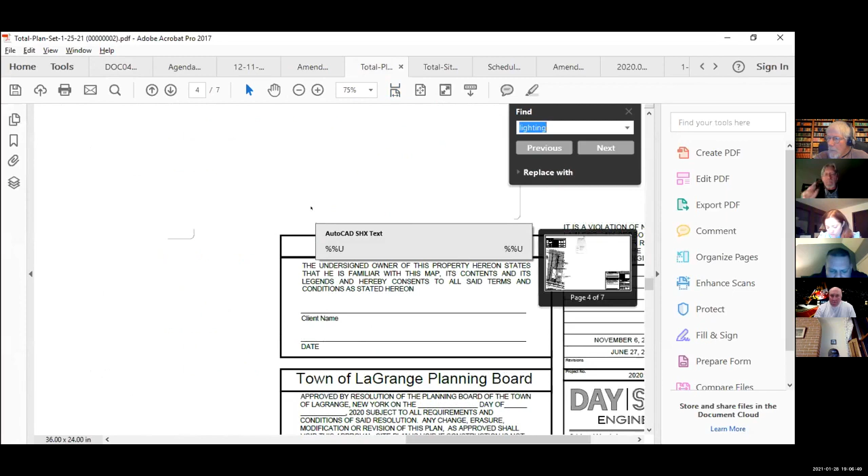We have a couple of infiltrators in the front of the property to handle roof runoff from the roof leaders. I show 2 rows of 3. We provided some calculations to support that design. And I think 1 row of infiltrators will work to contain a 100-year storm without overtopping, so we're just going to go with 1 row. That way the street trees that are within the parcel boundary can have adequate root space to grow in front of the property, so they're not inching toward the second row of infiltrators. So we'll go ahead and make that change.

Other than that, that's basically it. Just working through our final approvals. Like I said, this project will be subject to a DOT permit. We're going to do a slight feathering of the existing asphalt that enters the site.

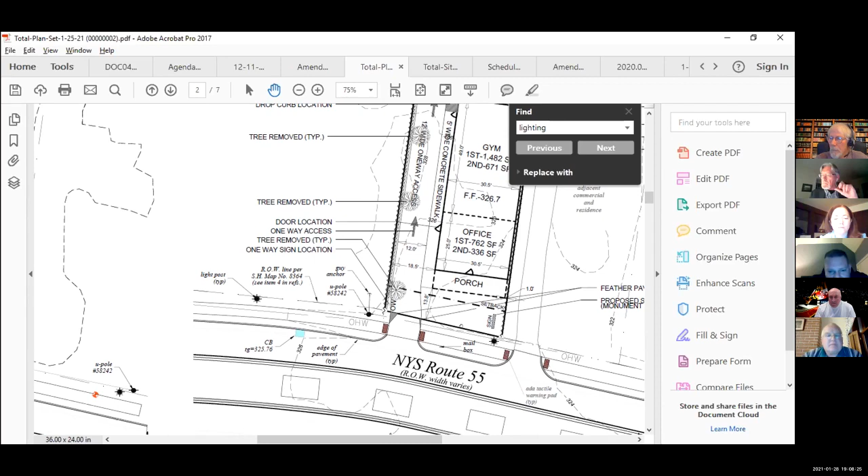There's like 8 square feet of pavement that we have to put in to establish the width coming into the site. Again, there's an existing entrance that will remain. We're just going to feather out the pavement. You can see it on the screen here with those 2 shaded areas.

And obviously we'll have a permit from Mike Kelly for Dr. Fink, and then we'll work with Wanda to secure the water supply modification. But again, all contingent items that we could kind of work through prior to chairman signing the plan. Other than that, that's it.

Chris, you're up. You're muted, Chris. Yeah. Yep, thank you. Nope, I had a frog in my throat and I forgot to turn it back off.

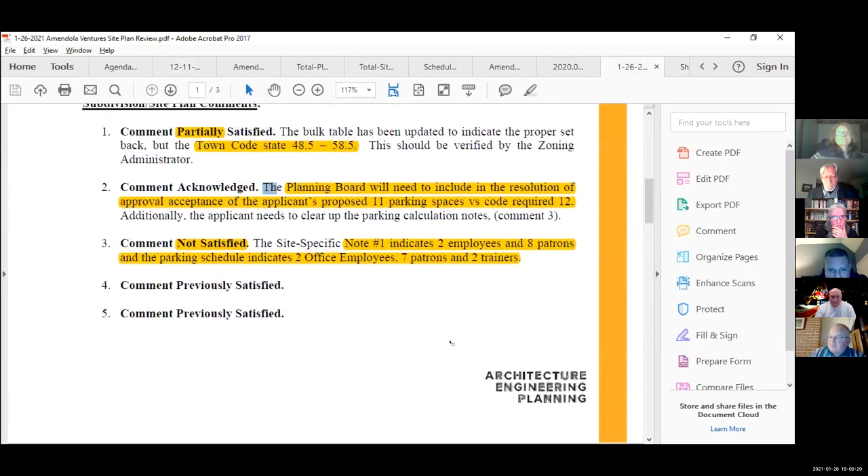All right. So I know that Greg Ballner from CPL had a number of comments in both his December 11th letter and his January 26th letter. Did you receive both of those, Brian? Yeah, I think we've worked through a couple of them. Again, I think these are like dot the I's, cross the T's kind of thing that we can work through after final. Yeah, there's a note on there to remove the chain link fence. We can do that. Working through the parking numbers in Board of Health.

I think there was a typo. It should be 7 gym clients instead of 8, I think, on the plan. So we'll make that notification, but the parking provided says 7 in one place and 8 in another, so it should be 7. Yeah, that was the Polish in me, dyslexic maybe. I don't know. So what did that leave us with? 11 total parking spaces or 10?

11, and the requirement under the code would be 12, so that's why they would be asking for a waiver of 1 less parking space based on the location of 7 patrons, 2 trainers, and 2 office staff. Okay, and that's based on the code, which says 1 parking space per 275 square feet gross area? Correct. I'm having a little difficulty hearing you, but it is the square footage requirement in the code, the number of parking spaces per 250 square feet, I believe it is. I'd have to look it back up, but it would be 12.

All right, good. And so there was also a question about the stormwater flow. Is that what you were talking about with the infiltrators, Brian? That's basically been addressed by the fact that he gave us the calculations on the infiltrators, and I had somebody in my office take a look at that, and the calculations were acceptable, and 1 row of infiltrators was satisfactory, so if they remove the 1 row of infiltrators, they have the 10-foot separation from the tree, so we don't have to worry about tree roots in the infiltrators.

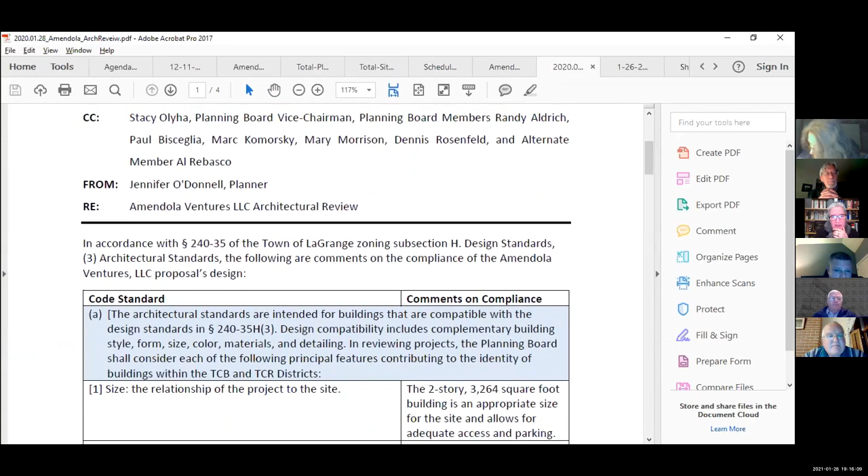All right, and then there was the question of the town center, which does require an architectural review, and there were some comments that we had about what was provided there. I don't know if it was Jennifer. Do you have the details on that? Yes, I went through the comments. I'm going to open that for you all. I went through section 240-35, subsection H, design standards, section 3, architectural standards, to see if the design complied. And actually a year ago when we met, most of these items were in place.

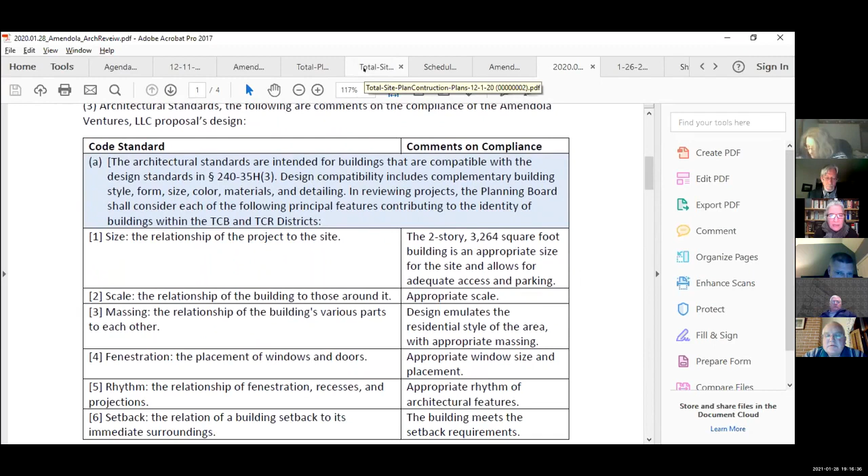So the building is a board and batten, 1.5 story, sort of 2-story. It looks like a residential structure. Let me see if I can, it's on the bigger plan. Hold on. And I only have a couple of questions for Brian. Brian, what page is that on? It's probably toward the end there. Yeah, so this is generally speaking

I can't talk right now. I'm in a meeting.

These are the elevations, and we had wanted to get them in color, Brian, but from what I remember, it is actually a monochromatic scheme, right? Yeah, white board and batten, black windows for the trim on the windows, and then standing seam black on the roof. Right. So the design from the beginning was very much in keeping with the architectural design standards. Here we go. There were just 3 points.

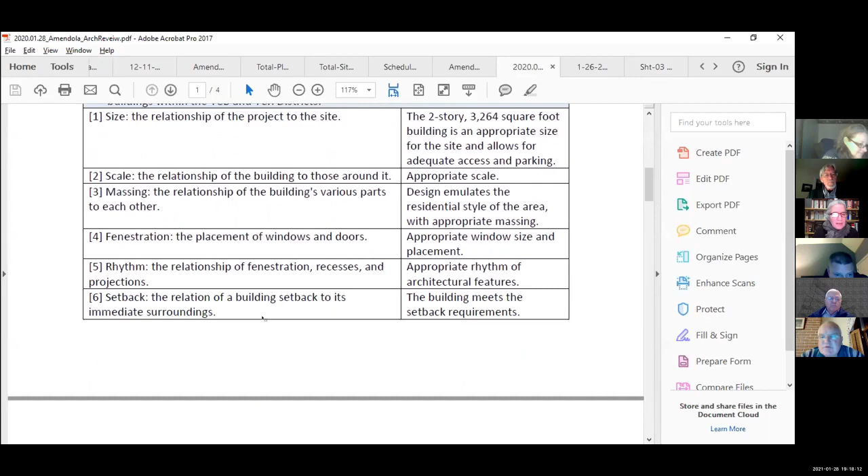Looking at this over, and this is of course only recommendations, the board can draw its own conclusions, but it seems to be appropriate in terms of its relationship to the site, the scale, the massing, the fenestration, the rhythm, the relation of setback to its surroundings, materials, except in one place where I found a contradiction. The typical wall section on sheet 104 shows asphalt shingle, so you need to revise that since I know you plan to do a metal roof. Yes, we'll coordinate details and notation. Okay, and chain link fence is discouraged also in town center, but I understand you're removing that.

And finally, the board and batten panels don't appear to extend all the way to the base of the foundation from what I can see on the elevations. The town center standards request that exposed or unfinished foundation walls not be present. So if there's a way to bring that board and batten further down, obviously it can't go all the way to the ground for moisture reasons, but if it can cover the seam between the foundation and the first level, that would be my recommendation.

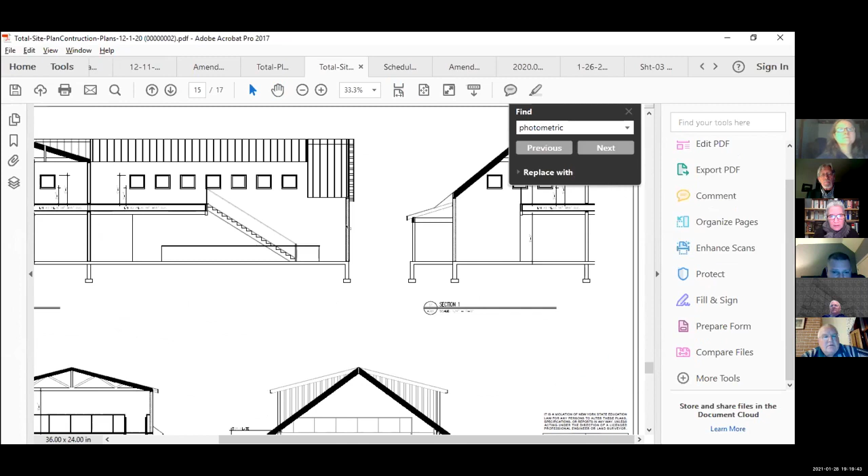Yep, we'll do that. The intention is, you can see here, that's the actual frost wall that goes down, so that's actually the footing of the foundation. If you look at the illustration above, that board and batten does go down. Okay. What you're seeing underneath is the footing or the frost wall. I just couldn't find a detail that demonstrated that. So Jennifer, go back up to the other one you were just on. The line sticking out by the door and by the porch, that's showing you what the elevation of the existing ground or the ground will be.

It was hard to tell. I could see that. Well, that's what I'm asking him. Yes. I'm asking Brian. Yes, ma'am. Okay. I just want Brian to confirm that. Mm-hmm. Yeah, I think what we're showing in this case right here is worst case.

The best case would be, this all works back to financials, as I know the applicant does some very nice stonework. So there may be the option down the road that he would maybe peel that back and do some nice stonework along the base. But as of right now, just to keep the budget, we're going to keep the board and batten going down to the grade.

Okay. So Brian, can we go ahead and make that a part of it, that if there are any exposed foundation walls they will be decorated in stone or covered in stone or something other than cement or cinder block? Yeah, most of this building is going to be at grade, so there shouldn't be exposed grade. This is more like from finished grade up to the window. Yep. To the bottom of the sill.

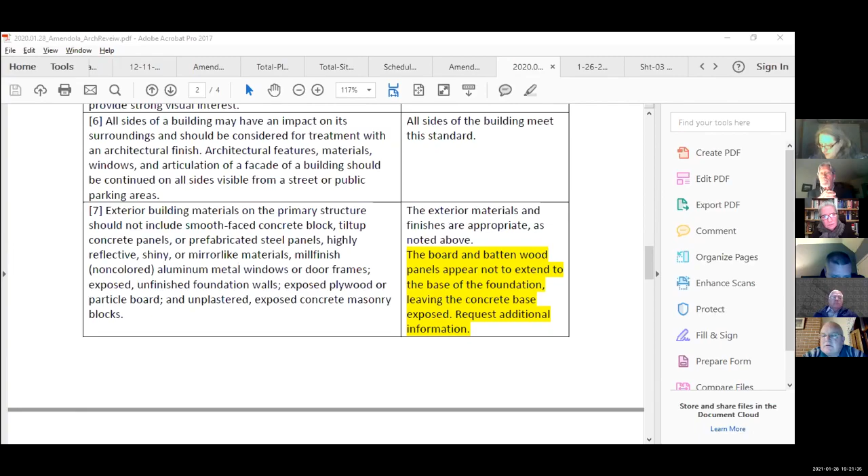Okay. Just like some nice stone detail, but as of right now, just from budget constraints, keeping the material going down. And just if there are changes, just check with the building inspector, okay? Yes, ma'am. Okay. All right. I have one more thing too, Chris. Go ahead.

In town center, what we've been doing is, because the high school had presented us with some good suggestions about our Blanding's turtles that are in that area, they suggested that we ask businesses to put up a sign in their parking lot that says, please check under your car for turtles or wildlife or something to that effect. I know that the bank has those signs. I don't know exactly how they're worded, so you might want to check that. Just one in there, just so that people know.

Sure, we'll handle that with a notation on the plan. Yep. Yeah, that's the Mid-Hudson Credit Union. Yes. Has the sign. Yeah, and the DEC liked that idea when we told them we've been starting to do that in town center. Good. All right, so are we satisfied with the details of that architectural review?

So let me just recap. He's going to fix the notations for the metal roof. So we're accepting a metal roof. Yep. He's removing the chain link fence. And the batten board is at grade, so there is no exposed foundation wall. Right. Okay, so we as a board, Chris, just have to accept the design architecturally, that an architectural review was done by the planning board and that we accept it. So it has to be before we do everything else.

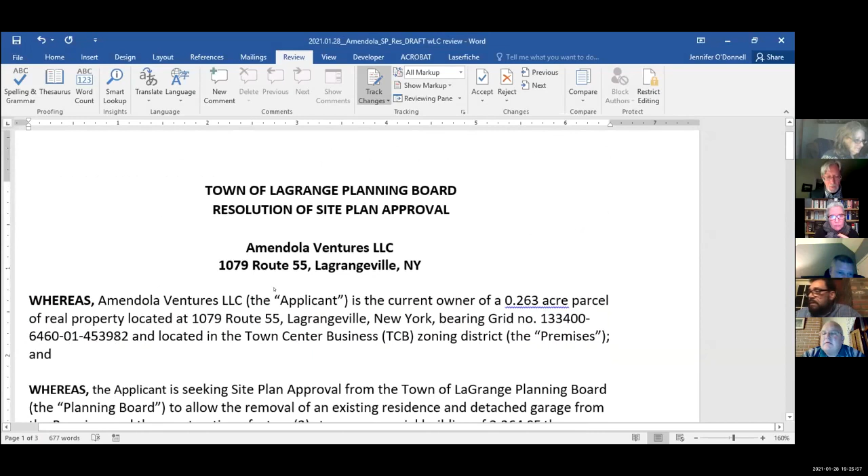All right, so I think the first thing we need to do is, and I'll need a motion to waive the parking to allow 11 parking spaces versus the code requirement of 12. So moved. Stacy seconds. All in favor? Aye. Aye. Is anyone opposed? All right, passed.

So we're also okay on the landscaping requirements, right? So now do we need to make that a resolution about the architectural review? As I believe, we vote on that, and we vote that the architectural meets town center zoning standards. We can do it. I thought we do that. Just put 240, I did. Yeah, 35. Yep. Okay, good.

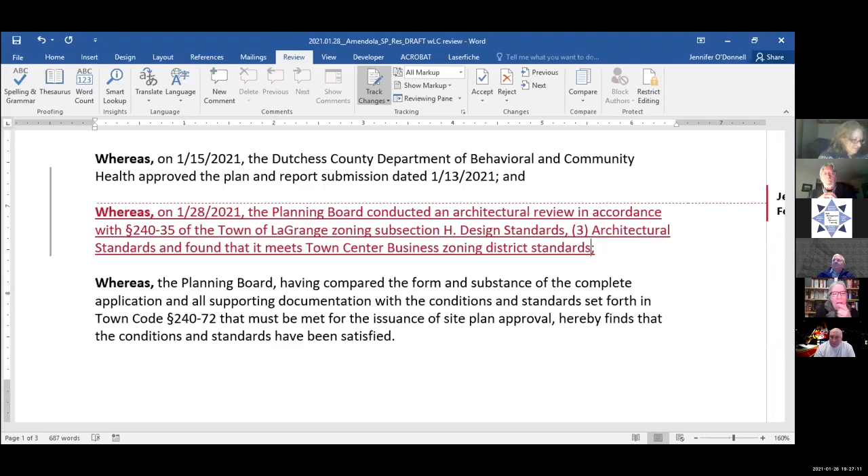So would you want to go through the resolution and the conditions now? Not quite yet. I do want to ask, so first up, we did go through some of the stuff, Greg, and I want to make sure that you're comfortable that the remaining things that need to be satisfied from your comment letter are sufficiently minor that you can review, that we could go ahead with a resolution and you'll monitor them and let me know, because I won't be signing the plan until you okay that they're all taken care of.

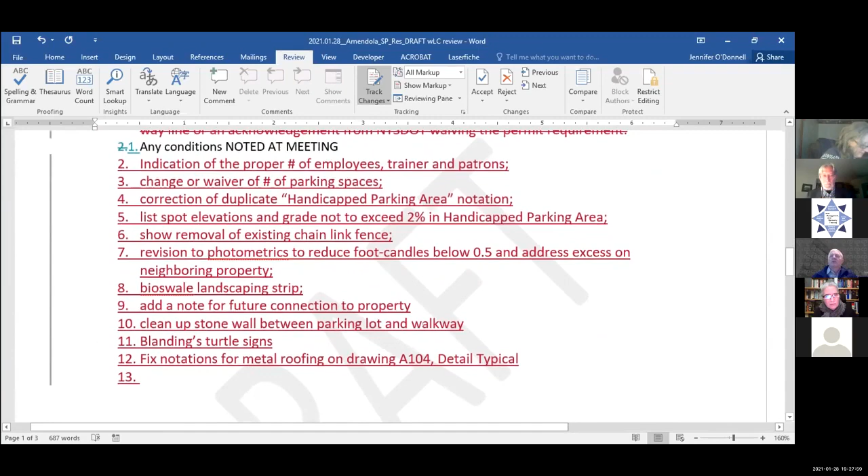Yes, I think the rest of them are minor. I will draw one more, and I think it may be in the resolution, but the foot candle lighting by the sign exceeds a little bit, but that's easy enough to address. It just needs to be addressed, and the photometric plan updated to address that. And the rest of them are just some note cleanup. Yep. Nothing of significance. All right.

Okay. Thank you. And then I would ask the town attorney if you're comfortable with where we are on this. If I can find my unmute button. Yes, I am. Okay, good. Thank you. All right. So if there's no other questions from the planning board, I'll ask Jennifer to go through the resolution. Okay.

So whereas Amendola Ventures, the applicant, is the current owner of the 0.263 acre parcel of real property located at 1079 Route 55 in LaGrangeville, New York, et cetera, in the town center business zoning district. I'm going to delete certain things that Lisa recommended if they're not, in fact, reused in the resolution. Okay. And whereas the applicant is seeking site plan approval from the town of LaGrange Planning Board to allow the removal of an existing residence, to construct a 2-story commercial building of 3,264 square feet.

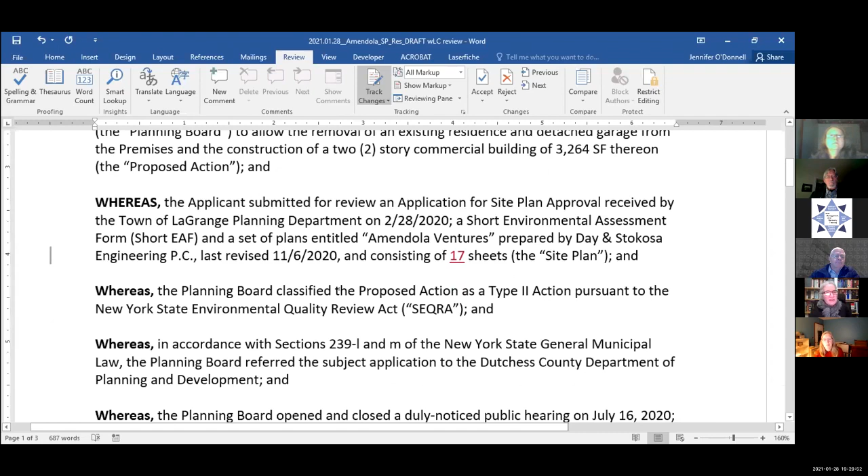And whereas the applicant submitted for review an application for site plan approval received by the town of LaGrange Planning Department on February 28th of 2020, including a short environmental assessment form, a set of plans. Does the last revision date of those plans need to change now? Yes, that's true. Last revised. Now it would be 1/24. Is that correct, Brian? 2021, yeah. Okay.

The one that you sent me consisted only of 7 sheets, but I think that might have been because you didn't include all the architecturals. Yeah, it was just a civil package. Right. But the whole set is going to have to consist of the 17 sheets, or at least I think it will, because of our architectural review.

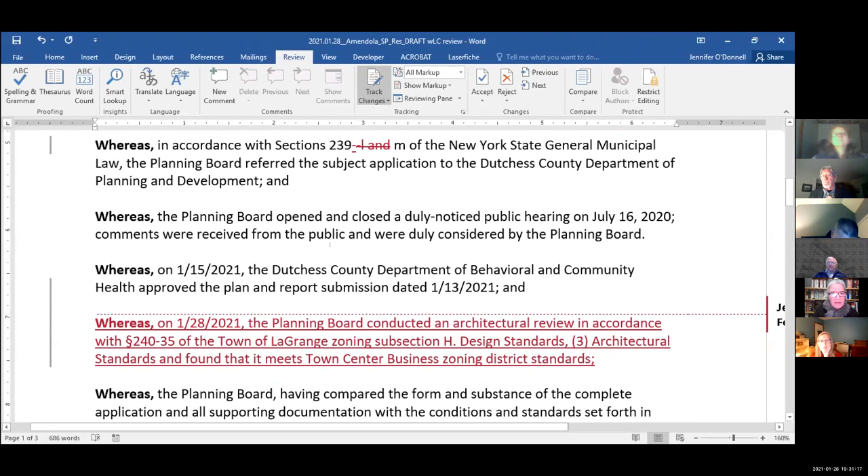Yeah, okay. Whereas the planning board classified the proposed action as a type 2 action pursuant to SEQR, and whereas in accordance with section 239-L and M of general municipal law, actually it was just M, it was referred to Dutchess County Planning. You should really reflect there what Dutchess County said, whether it was local concern or local concern with comments.

Well, in fact, they did not get back to us. The first time around, they asked for landscaping and photometrics, which Brian provided, but they didn't respond. The clock went over on their 30 days. Eileen checked with them. Isn't that right, Eileen? Eileen, you're probably muted. Yeah, I resent it to Brad Barkley on December 3rd electronically, and I even followed up with him in an email, and he never got back to me. So. Okay.

So that gives us a default matter of local concern, I imagine, right? Sure. Whereas the planning board opened and closed a duly-noticed public hearing on July 16th, 2020, and comments were received from the public and duly considered by the planning board.

And in fact, I'll just make a note here that the concerns that were raised by the neighbors regarding the speeding on Fink Road, we did a little analysis of that and what we could do, and ultimately an additional stop sign was placed there, and we hope that that's helping the circumstances. And whereas on January 15th, 2021, Dutchess County Department of Behavioral and Community Health approved the plan and report

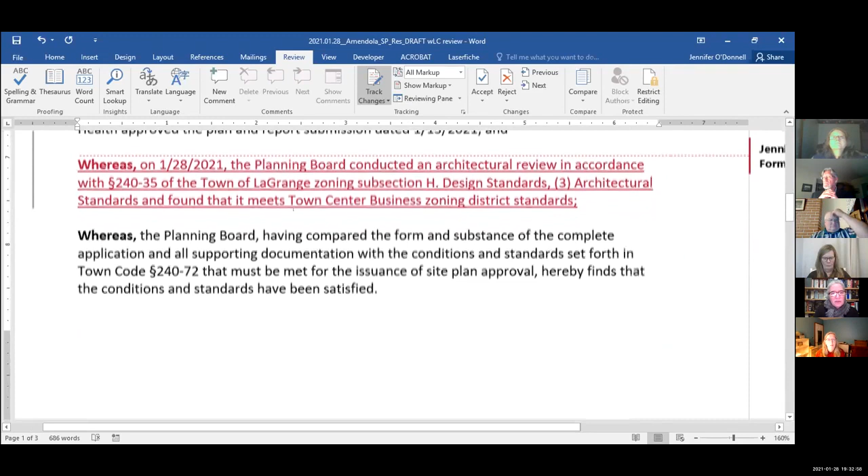submission dated 1/13/2021. And whereas on today, the planning board conducted an architectural review in accordance with section 240-35 of the zoning, and found that it meets town center business zoning district standards. And whereas, having compared the form and substance of the application, the board finds that it meets the conditions.

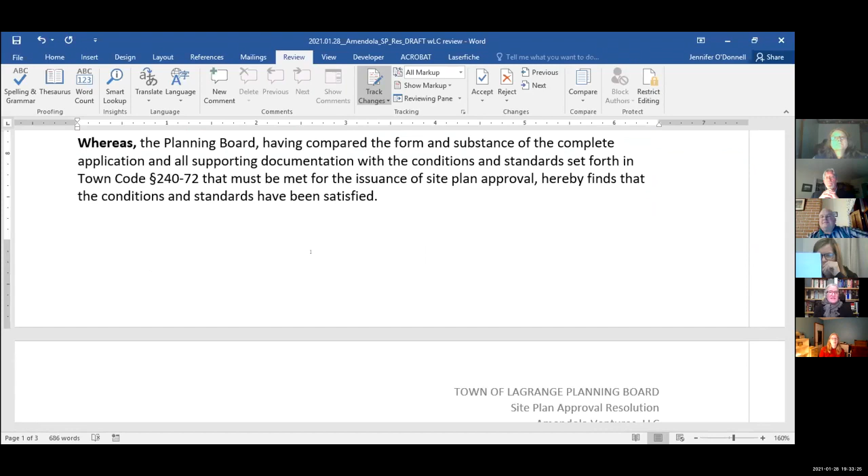Now, therefore, be it resolved that the planning board hereby grants site plan approval to the proposed action and adopts this resolution of site plan approval subject to the following conditions and modifications, which must be satisfied prior to the signing of the site plan by the chairman of the planning board. Now, there was a comment by Greg, and I just wanted him to mention why it's been removed since the last draft that you received. Brian, not Brian, Greg, would you mind?

The first comment, is that what you're referring to? Yeah, the DOT comment regarding the widening of the driveway. The DOT comment. Brian had spoken to the DOT. He identified that, and the DOT will not typically issue a permit. They'll simply issue an acknowledgement or a conceptual plan review, because the permit is issued to the contractor performing the work. Okay. Typical. So if you agree, that's not a condition of our

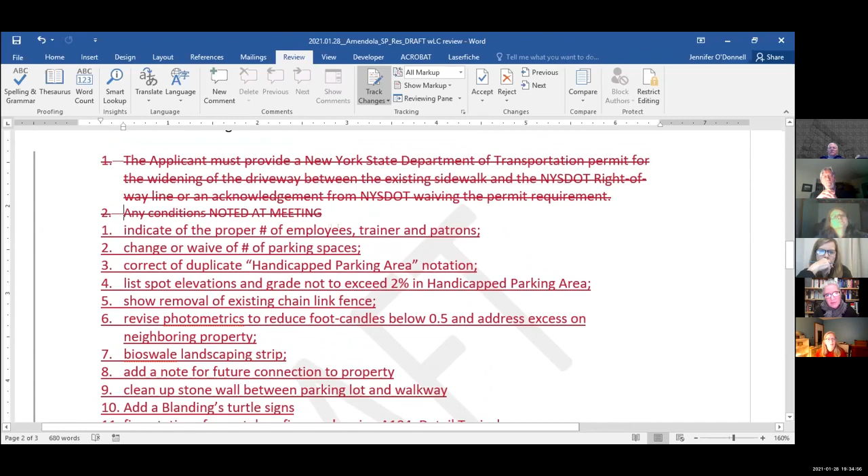approval. Number 2, do we have to do a whereas at the top that we waived 1 parking space to 11 instead of 12? Yeah, that's one of the questions I have. So Brian needs to change the notation of the proper number of employees, trainers and patrons. And does the board want to waive? We already did, didn't we? We just voted on that. Okay, so should I put that up above? Yes, that's supposed to be a whereas. Okay, I will put that in the whereas, that it's waived from 12 to 11, right? Yes, we waived 1 parking space.

Do you trust me to do it, or do I have to do it in front of you? You can do it tomorrow and you can send it to me and Eileen, and we'll approve it then. Okay. I mean, in general, you don't need to read anything that the board doesn't need to consider or vote on for these. So the beginning opening parts where you talk about what the project is, you don't have to read those at the meeting. You can simply jump to the conditions and make sure that the board agrees that there are no conditions that should be there that are not there presently. Happy to do that. Thank you.

So indicate the proper number of employees, trainers, and patrons, correct the duplicate handicap parking area notation, list spot elevations and grade, not to exceed 2% in the handicap parking area, show removal of existing chain link fence, revise photometrics to reduce foot candles below 0.5 and address excess on neighboring property. And I don't know what you said about the bioswale landscaping strip.

Did you have? My question about that landscape area was simply, is that a bioswale or is that simply a landscape area? And I'm not saying that it has to be one or the other. Brian, is that just a landscape area or is that a bioswale? Just a landscape area. We have our septic that's close to that area. Okay, that's understood. So it's fine that that's a landscape area. I just had the question. You don't need a clarification. No, they don't need to have that as a condition.

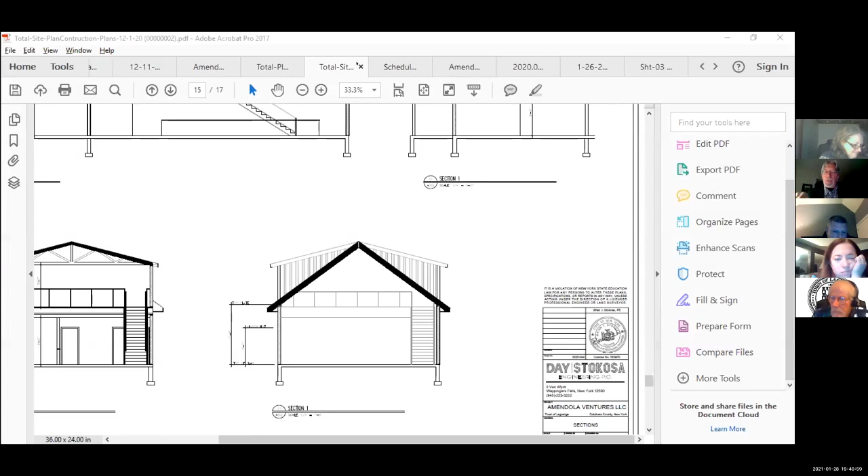And I would take a moment before we move on to the next item because I was remiss. I had not introduced our new planning board alternate to the rest of our planning board. Al Robasco is joining us. He was appointed recently by the town board, and I'd like us all to welcome Al and wish him many long nights spent with us. Welcome, Al. Thank you. Welcome, Al. Welcome. There you go, Al. Thank you.

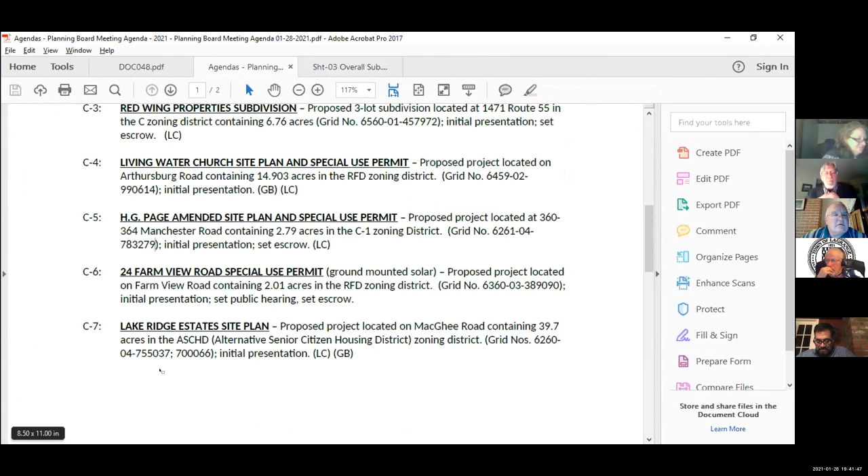Thank you. So the second point is, given the length of this particular agenda, I'm tentatively scheduling a short 5-minute break in between the Lake Ridge Estates and the Daily Farm item. If it turns out we don't need it, that's great, but I just want to put that on the table. I don't want people to have to be trying to attract my attention on the screen to say, let's get out of here for a minute.

All right, so the next item is Partner Rentals. This is an amended site plan and special use permit. Proposed project located at 84 Knoxon Road, containing 4.21 acres in the MGH district. That's the Manchester Gateway Hamlet district. Because of it being in that district, the special use permit is required for outdoor storage of rental equipment.

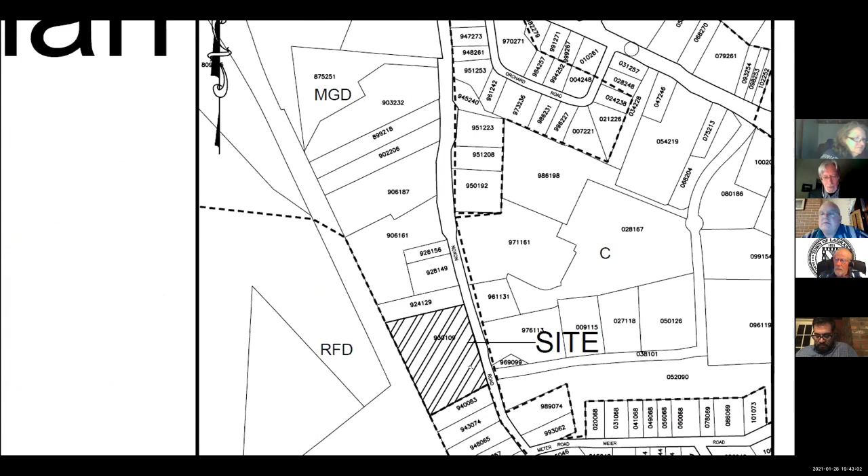And just to let people know, in case you haven't seen, this is almost directly opposite where Fireman's Way comes into Knoxon Road, where the old metal fabricating place used to be. It's since defunct. Our applicant is Fernando del Aguila, Partner Rentals, and Brian, I think you're up as their engineer as well. Yes, sir. I appreciate the good intro. If we could scroll to page 2, let's zoom in on the existing conditions and then we'll head on over to proposed.

This is the existing metal supply building that's located across from Fireman's Way. What's on site now is an existing slab where there used to be a building, where Jen's highlighting right now. Toward the rear of the building, there's an existing 50 by 60 portion of the building. Then behind that, there's a small shed area. There's an existing asphalt entrance into the site, and then it transitions into a hardened gravel surface. The site does have central utilities running past it along Knoxon Road, both sewer and water.

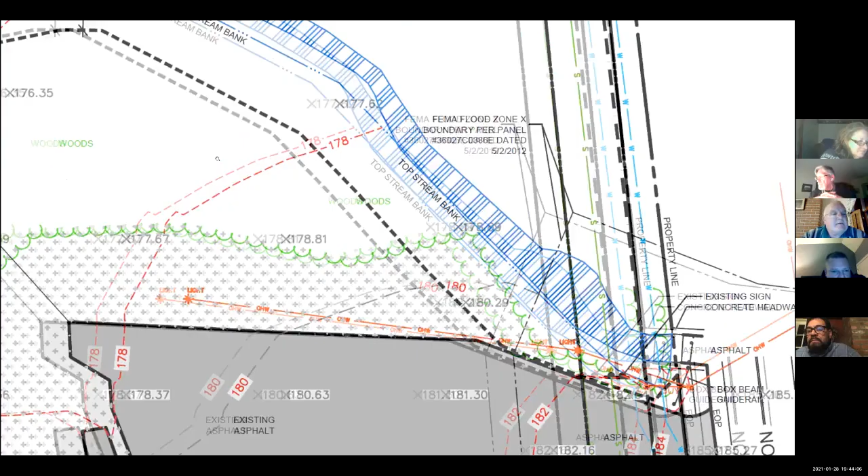And there is a stream located just north of the existing entrance in that highlighted blue section. It travels from Knoxon Road toward the rear of the property and then eventually goes under the rail trail. The big thing is the rail trail is right behind this building. So what the applicant is proposing to do is reestablish the building on the existing slab and repurpose the existing shed area and existing commercial portion that still remains and convert this into a commercial rental business. I want to say about 90% of their business is commercial accounts.

And with this action, they would be storing rental equipment on site toward the rear and toward the north in the slant hatch pattern that we're showing in the parking lot area. A majority of the site is already impervious. Where the commercial equipment is going to be going, we would transition the portions that are not hardened surface into hardened surface. There'll be a gate at the entrance for security purposes. 90% of their work is commercial based, so they actually take the equipment to the site and drop it off.

It's used, it's then picked up by their operators and brought back to the site. They have a retail component, but the bulk of their business is commercial rentals. They have an existing facility across the river in Kingston, New York. They'd like to come across to this side of the river and establish a location here to service the community.

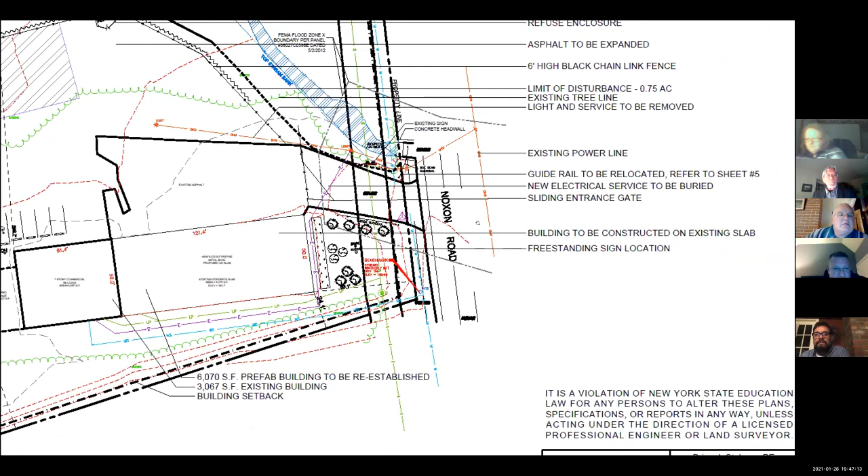May I ask a question, Mr. Chairman? Go right ahead. Brian, couple of questions. Will there be fuel oil tanks on this property? And if so, will they be stored indoors or outdoors? Being a rental business, there will probably be some commercial storage on site, probably outside within a containment unit. Okay, so with bollards around it and all the protective devices that are needed? Yes, sir. We will provide you additional detail on that and the locations of such. This was just to get the presentation in front of you. Okay, also on concrete pads, I'm sure?

Yes. Okay, and the other question is, how high will the chain link fences be around the property? I think right now I may be showing 6 feet for security purposes. That seems to ring a bell. That's what you're showing right here, Brian. There we go. Okay. Do you feel that's sufficient, or should it be a little higher? I could talk to the applicant about that. What's the board's feeling on a higher chain link fence?

Brian, you should check out HO Penn, because they're probably going to have some similar equipment to what these guys have, and kind of the same operation, only they work mainly with Caterpillars. I think theirs is taller, but this property is the first property in the Gateway Hamlet. So you have HO Penn, then the house and the apartment building, and then this. Those are all zoned something else. This is the first parcel of the Gateway Hamlet in this section of Knoxon Road. I just wanted to let the board know that.

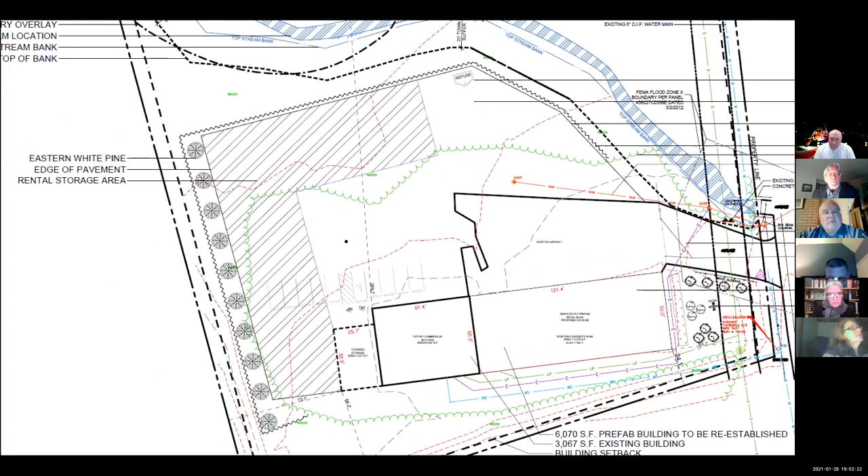And so no equipment whatsoever is going to go on a paved parking lot. Is that what you're saying? I can't read what that says. There's some tiny words right in the middle. I think it just says existing asphalt. Okay, yeah. So in the existing asphalt area, there you go. So that's not going to have any of your rental equipment on it.

That's the main access point coming in, and a lot of their deliveries are via tractor trailer. So if there is anything there, it'd probably be on a temporary basis for pickup or drop off, and then moved inside for servicing. Like a loading zone kind of thing. Yeah. Okay. We might want to delineate that as a loading zone area for delivery, so that we know that there might be something waiting there to go out. So if it's sitting there for a day, it's okay because it's in the loading zone waiting to go, if you understand what I'm trying to say.

Yep. And you're going to actually build another building on that pad in the front, right? The existing slab where the burned out building is, that's going to be a new building? Yes, ma'am. Reestablish the building. Same footprint. Based upon our input from tonight's meeting, we would go back, refine the layout based upon input from the board, with the next submission having full renderings to give the board an idea.

The applicant's colors are a whitish color and a red. That's their company logo. So there would be a theme of red and white on the building. They usually have a red stripe going through the building, but we'll show that in greater detail with color renderings in our next submission. And that's going to be for equipment, or for offices and other things like that? It's going to be a combination of both. Equipment, maintenance, repair, office, and that will be highlighted in our submittal package.

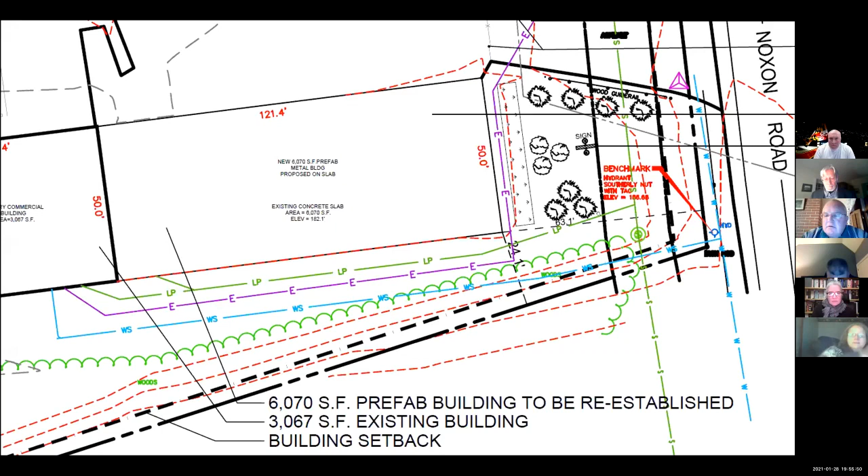And also think about the rail trail side, because I know you have your building in the front. That's a 1-story on the rail trail side. Is that going to remain, or are you tearing that one down, or reusing it? Well, the idea was to reuse, to keep budgets in line. Yeah, so it will give that illusion of the different heights. You know what I mean? So just make it blend in nice to the building that's coming into the front.

Will do. Brian, do you anticipate having in the interior any loft space, up some steps? There may be a mezzanine section in there. We'll talk it over with the applicant, and if we do, we'll provide you access points and square footage. Great, thank you. Right. Anybody else on the board like to request information to be included in future submissions that we haven't talked about already?

I'm wondering if you could come up with some idea of traffic flow into there, like how often the tractor trailer deliveries might be occurring. It would be helpful for us to understand that. Yep, we will quantify. Super. Anybody else want to bring anything up on that, planning board?

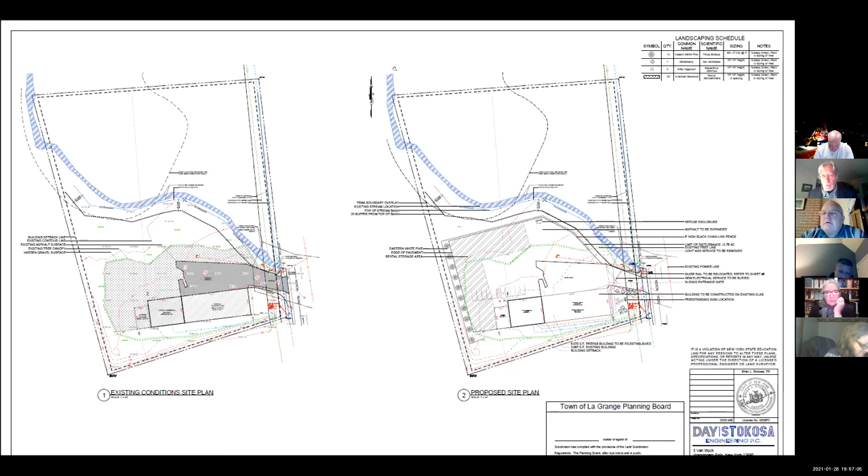So, hours of, oh, go ahead. Go ahead. Hours of operation? Okay. I think I have it on the cover sheet, Jen. I think it's 9. What are we, 9 to 5? I'm getting older. Monday through Friday from 7 to 5 and Saturday from 8 to noon. There we go. Okay.

So just another question. So your fence around your property is just in the areas where you're disturbing? You're not going to do the whole property, right? Just in the areas of disturbance where our rental will be, fencing will be inside of the tree planting, so the tree plantings will be on the outside. Okay.

And you've got some trees out in the front too, I think. Yeah, we provide some shrubs, some trees in the front. But we don't want to lose total visibility on the building, but some low growth. Right. Just look in the zoning, the hamlet zoning for that too, because that's specific. So just take a look at that too.

Yes, ma'am. All right, so before we move on, I think we're going to need to set an escrow on this. And I believe for this kind of thing, we normally do $2,000. It's an amended site plan and a special use permit. Do I need a motion for that, or do we just say? Well, we've been doing it, so we might as well be consistent until we change something. Okay, so let's do it.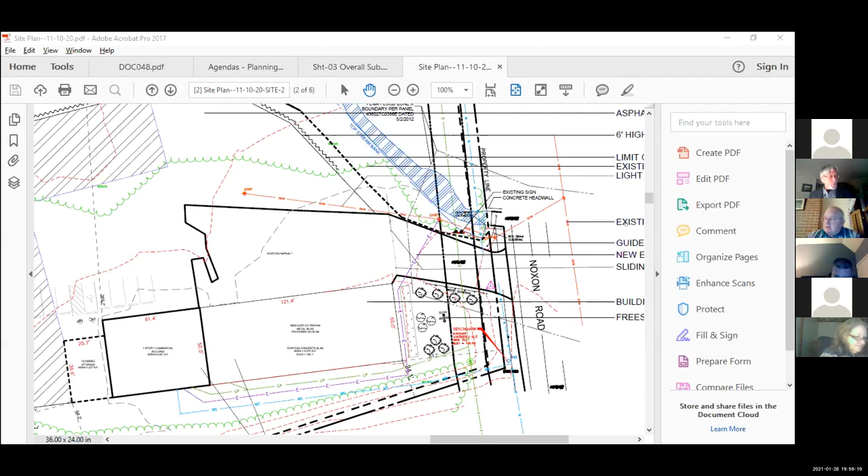Can I have a motion to set the escrow for $2,000? So move. Second? Second. Randy? Second. All in favor? Aye. Aye. Anyone opposed? All right, the escrow is set for $2,000, and we look forward to seeing you come back. Thank you, sir. Thank you, guys. Appreciate it. Thank you. Yep. Don't go too far, though.

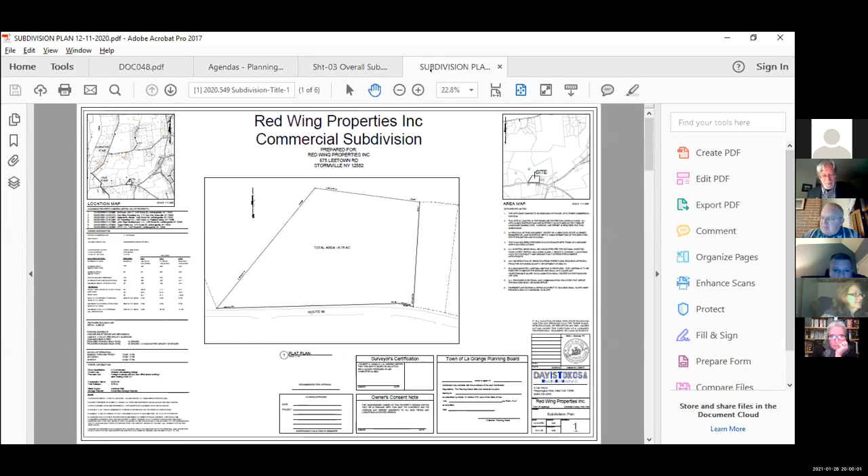The next project is Red Wing Properties. It's a 3-lot subdivision located at 1471 Route 55 in the C zoning district, containing 6.76 acres. The grid number is 457972, if anybody wanted to check that. The applicant is Paul Doherty, Red Wing Properties, and the engineer is Mr. Stokosa. We're back. Jen, if we could go to sheet 2.

So if we go to our upper right-hand corner here, this is our existing conditions plan. In this plan, I try to detail the site as it exists. Actually, we have 2 entrances off of Route 55 that go into the parcel. You can see one there. This is at the high point of Route 55, plus or minus. As you go toward Planet Fitness, in the westerly direction, there's another graveled entrance that leads to the back. There's an existing dwelling in the back right now that is occupied.

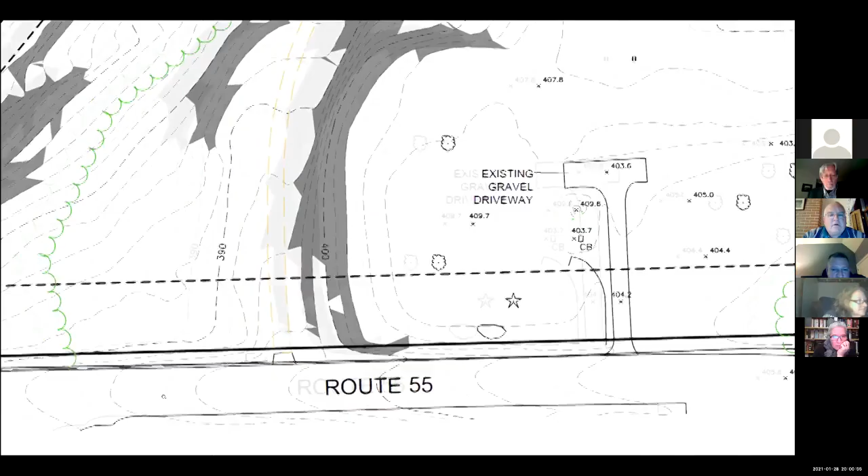What the applicant would like to do is a 3-lot subdivision. So there would be two pieces subdivided to create 2 small retail buildings in the front, and then the third piece would continue to support the existing dwelling and the existing access point. What Jen's pointing to is the same access point that exists today, and we'd just modify and widen that to have a commercial entrance to service the 2 parcels.

And then once you're into the site, there'd be a common drive, and we would venture over to the buildings left and right. Each have their own well, their own septic system and parking lot areas. In talking to the applicant, he was looking to do just a retail building, retail pad site. As of right now, no specific interests in the site, but just to start the process of trying to create these pad sites.

With the drawing that I'm showing here, with the hatched areas that are shaded, the dark gray hatch is your areas of steep slopes. With each of these commercial pieces, we show small bioretention areas in the back to mitigate any stormwater runoff.

Other than that, there's some preliminary landscaping shown. The goal for tonight was to introduce the project to the board, establish escrow, receive feedback from the board, and obviously take the application and start providing more detail with landscaping, lighting, moving toward renderings, but obviously just tonight to get a feel from the board.

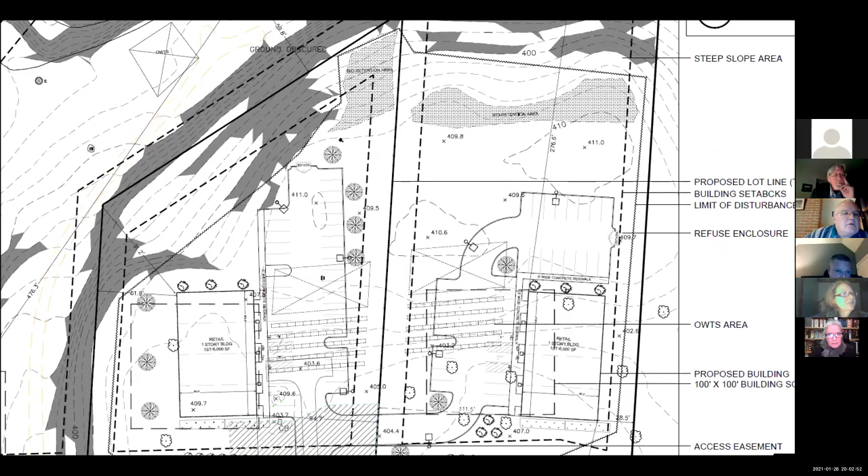On the parcel that has the little cottage on it, is the cottage the little square that's way in the back? Yes, ma'am. Okay, so can you just show the driveway to that, or are you going to share the driveway with something? The driveway is going to exist. It exists now, and we show it to remain. Okay, because oh, it's on that one. Okay, I don't see it.

Oh, it's very tiny. Very faint. Yeah, very faint red line. I've got a very old monitor, and I can't see it. So, okay. I'm testing everybody's eyesight tonight. It's on mine. It's yellow. Here, it's very faint. It starts here. It goes up this way. Yeah. And leads to the square. Okay, I see it now.

And you're going to have some screening there. So is that hill up, or let's see, which way are we going? I don't see the contour numbers, they're too small. Yeah, so the high point, we're going down. So wait, I don't see where we are. There we are. Okay, so we're going down. So the front property is higher than that little cottage? Yes, ma'am. Okay. And what's the elevation down there at that cottage? You're probably 15 to 20 feet lower. Okay.

And that's all wooded? Well, right now where the commercial aspect is proposed is all open meadow, grass area. Toward the back, as you work toward the back, around the cottage area, it is wooded. You can kind of faintly see the green tree line. Yeah, it's a little squiggle. Yep. Okay.

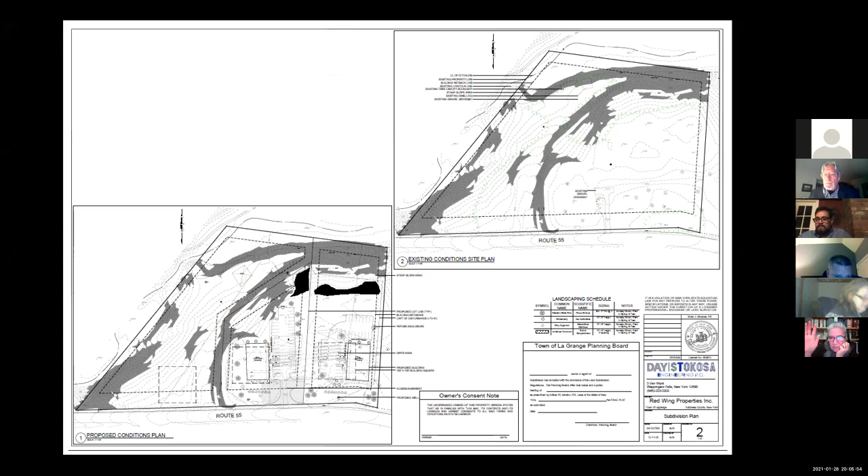Chairman? Yes. I just wanted to note that as of right now, the zoning is commercial. But Brian, take note of your bulk table, where's that? On the other side. Yep, right there. Zoning information. That'll change, although it suits both zoning districts, but it may change to general business if the FEIS is approved and accepted. Correct. So this wouldn't be grandfathered in to the old zoning for this particular project?

Sorry, the question? So the question is, since this is starting under the commercial zoning, would this particular project continue with commercial zoning for the reviews? Would it be grandfathered into that for this review? I think I asked that question to Lisa a few weeks ago. Lisa, do you want to add?

In general, the zoning that applies is the zoning that's in effect when you get your approval. It would really depend how the town board enacts their local law. They could make it only going forward or apply to things that are in the pipeline. But for this application, I don't think it's going to make much difference because the uses proposed are allowable under both. So unless it changes certain setbacks in a significant way, I don't think it's going to have much impact one way or the other. Yeah, it's not affecting this property. But the short answer is, typically, when you get your approval is when your zoning is locked.

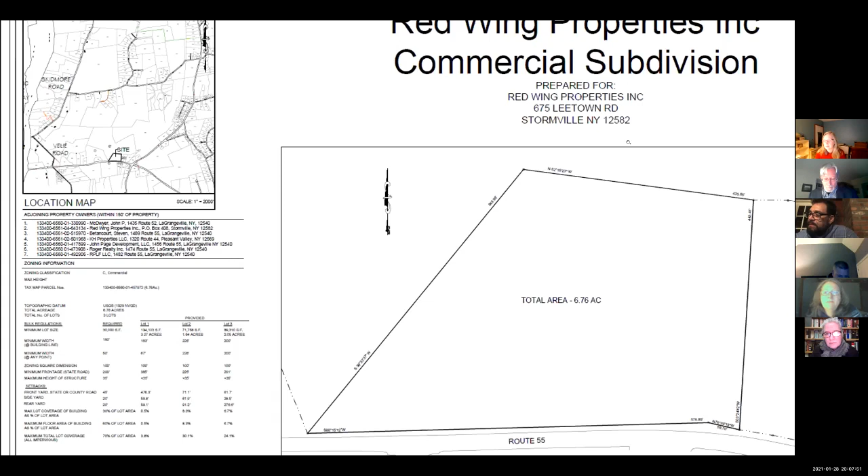Yeah, if you've had preliminary approval, but site plans don't get that, only subdivisions do. If you've had preliminary approval, then you're locked. If you don't have that in the subdivision, then you're not locked in. I think that's how our law is usually written. So it sounds like the zoning may change before we get the second submission from Brian, but we'll see.

I do want to point out that we had a letter from the LaGrange Public Works dated 1/17. Hopefully you've got that, Brian. It asks that you be directed to work with the Public Works Office to address MS4 compliance before the next submission, and then points out that it will require a review by DOT. They're also asking for floodplain, riverine wetlands, and wetland buffers to be added to the next submission.

Yep, understandable. Thank you. Any additional comments from the planning board? Anything you want to ask to be included in the next submission? What's it gonna look like when it's landscaped? To look like Disneyland. That's what we want to hear. Yeah, we'll get you some renderings. We'll get you a full landscaping plan, but obviously we'll do something that complements the site, complements the corridor, but also still maintains visibility to the site. Beautiful, beautiful.

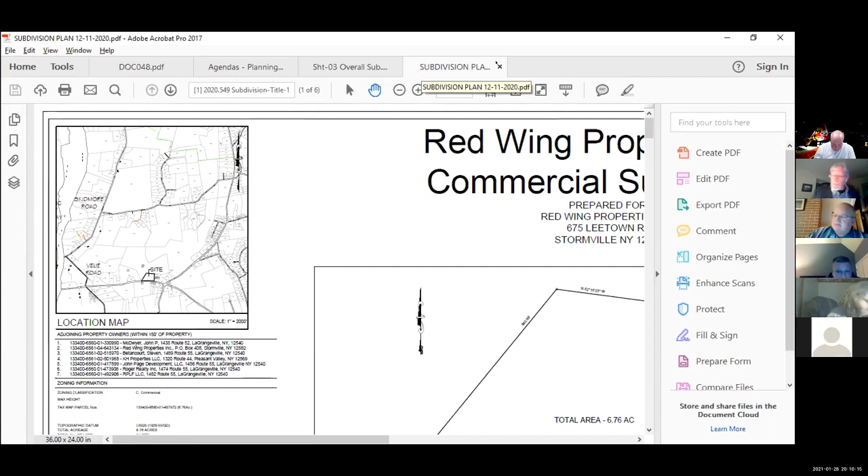So our next project. Wait, before Brian leaves, is Brian still here? Brian, you still here? Remember, we wanted to think about site visits for these. Oh, I'm not sure we want to do site visits for the initial. I think I'd like to see the next submission before we do that. Okay. Sometimes there's a very, very lengthy delay between the initial and an actual submission. There are two that I think we should consider site visits later on in the agenda. You okay with that? Yep, I'm good.

Okay. So we're now up to Living Water Church. This is a site plan and special use permit. This is a proposal to construct a 21,850 square foot church and worship center on Arthursburg Road on a parcel that's 14.9 acres. It's in the residential flexible district 80 zoning district. The reason why a special use permit is required is that in the RFD 80 zoning district, a special use permit is required for civic buildings and places of public assembly, such as churches. So our applicant is Kenneth Ewalt, Associate Pastor, and we have the engineering firm of Renier, represented by Peter Sander, that's handling this. Is there a representative of this project on hand?

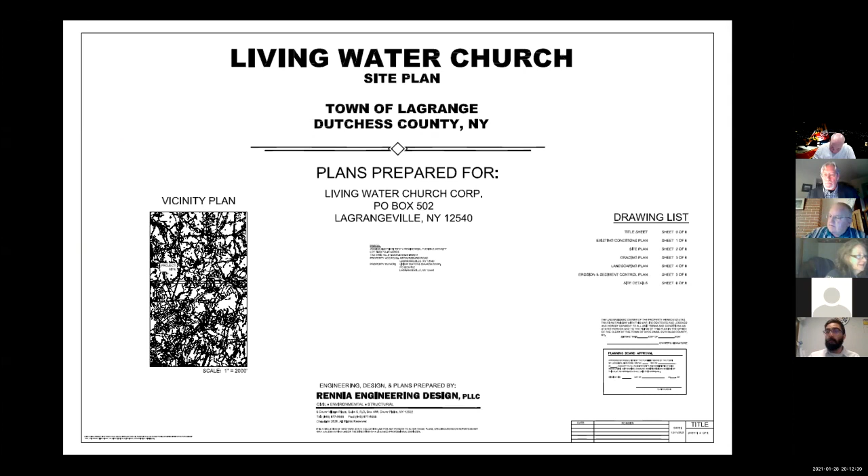So I'm just going to give you guys a little rundown of what we're proposing, and we'll open it and discuss it once I'm done. All right. So the applicant, Living Water Church, is proposing a 21,000 square foot plus or minus church/sanctuary building on Arthursburg Road. As you said, the parcel is located in the RFD district, requiring a special use permit. As you can see, the proposed structure is sitting on top of a hill, and you access it via this proposed boulevard entrance coming off Arthur'sburg. You'd come up the road and enter the parking lot area where you'll see the structure. The proposed structure is approximately going to have seating for 400 congregation goers.

Included preliminary plans show that we're going to have a mezzanine area with classroom space for toddler and pre-K religious education, and also office space for the church to conduct their administration work. There's also going to be a large foyer, which allows all the congregation goers to enter in this really aesthetic looking area overlooking the hillside. Also included will be a new deck area, which will allow people to congregate outside, as well as a tiered grass lawn, kind of similar to how you see it on college campuses, where you'll have grass and then a nice retaining wall that will allow people to sit and lounge out there.

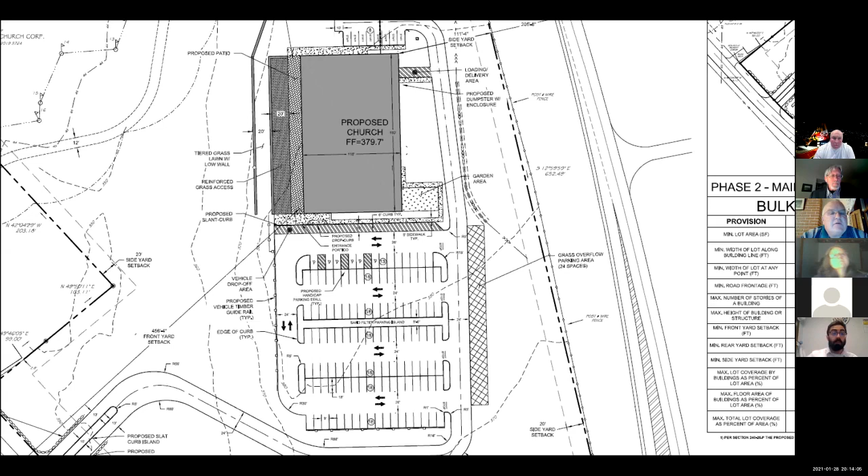Also shown on the site plan is a potential for phase 2. It's just very preliminary thoughts of possibly adding a pavilion area and then a maintenance garage for congregation goers to kind of repair their equipment and also store on-site equipment. Included as part of the development is the access drive off of Arthur'sburg, a new parking area, new septic, and stormwater features to accommodate all the proposed development.

Other than that, it's a fairly straightforward site plan. We wanted to just submit something preliminary and get some initial comments and feedback from the board, make sure we're on the right path, and be able to provide you more detailed plans in the future. Okay. I did notice that when you came to visit us in February of last year, pre-COVID, in fact, you had presented that preliminary idea of 16,675 square feet. So that was one of my questions, that you decided to upscale that. And it also was at that time to be located on 2 undeveloped parcels. So I'm assuming that you've combined the parcels and now it's a single parcel?

Correct. So both of the parcels have been combined, and the increase in footprint is after speaking with the architect and trying to work on the assembly space configuration. It turned out we didn't have enough space to accommodate the more modern designs with the angled seating arrangements towards the stage area. So we've had to expand it, and included with the expansion, we added some additional office space and classroom space. So that's for the expansion.

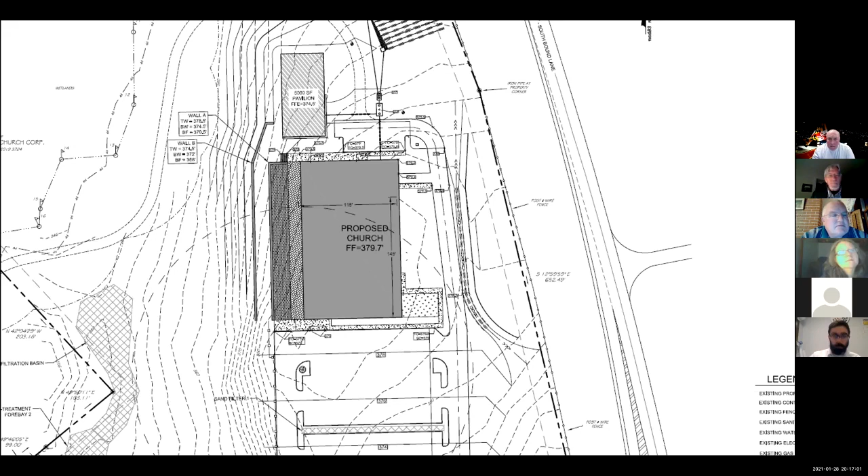Okay, I'm still confused. So lot number 1, LLC, do you own that? Lot number 1, that square parcel that's shown kind of in the middle, that is not owned by us. Okay. And you have an easement that goes across that? Is that what you're trying to say? Correct. Yes. You have an easement that goes across lot 1 that says you can use it as an access road. There might be a little more interpretation, but based off our previous review of the subdivision documents, it appears that the primary parcel does reserve an easement for that. Okay, so you should check into that easement because you'll probably need a new one.

Okay. Peter, on the secondary access road, what material will you be using for that? We were just thinking of a typical gravel access. Again, the primary entrance for the site would be the boulevard entrance off Arthur'sburg. We would not really want guests and churchgoers to go through that parcel on a regular basis. It's more to serve as emergency egress and then a possible walking path if people wanted to come down and check out the wetland areas. Okay, thank you.

I don't know how many of the planning board members know where this is or have seen it, but it's very beautiful. It's got some tall trees, very little underbrush, but a lot of rock and a lot of stone walls and what looks like what used to be driveways or some kind of paths cut into everything. I'd like to see some of that saved if we can, and incorporated into your drive to get into the site.

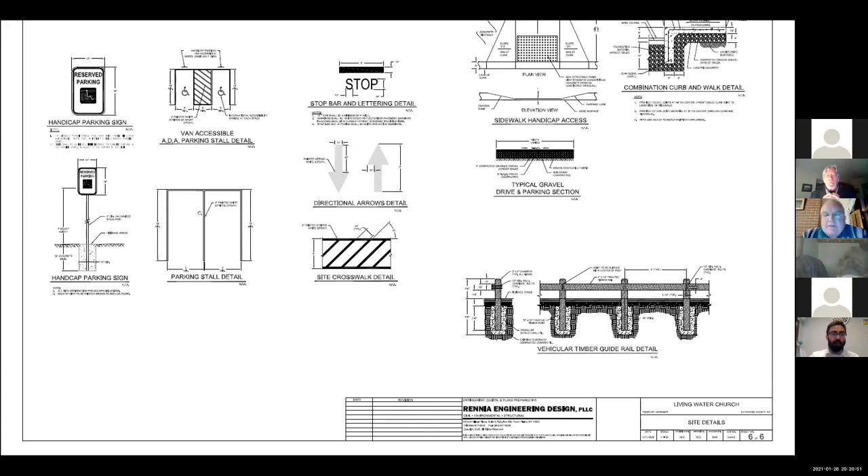And you did mention that the original intention was to do a steel frame building, but have more of an Adirondack Lodge style. Is that still your intent? Right. Yeah, that's absolutely still our intent. We kind of want to use some stone surfaces. It really gives it that rustic feel. We'll provide building elevations in future submissions as required, but I kind of wanted to run this idea and make sure that we were going in the right direction.

I do want to touch base again on what you mentioned about the potential future use in that upper area, there's a structure, possible proposed structure that's got the X on it. Sorry, that is actually not a structure. That's the location of our proposed septic system. It's that little tiny one right there. Yeah. It's right here, 5,000 square feet. Okay. And what would that be?

Just a pavilion? Yeah, again, this is a very preliminary thought based off of conversations with the applicant. They wanted more of an open space in the future, so it would be an open air pavilion currently. There may be some sort of enclosure to provide some bathroom facilities, which shows our connection to the existing septic tank. But again, this is a very future phase, where our primary objective is to get the proposed church structure in there first.

Well, you might have to build that one first so you can have everything outside and a social distance, you know? You might need to just open up the whole building.

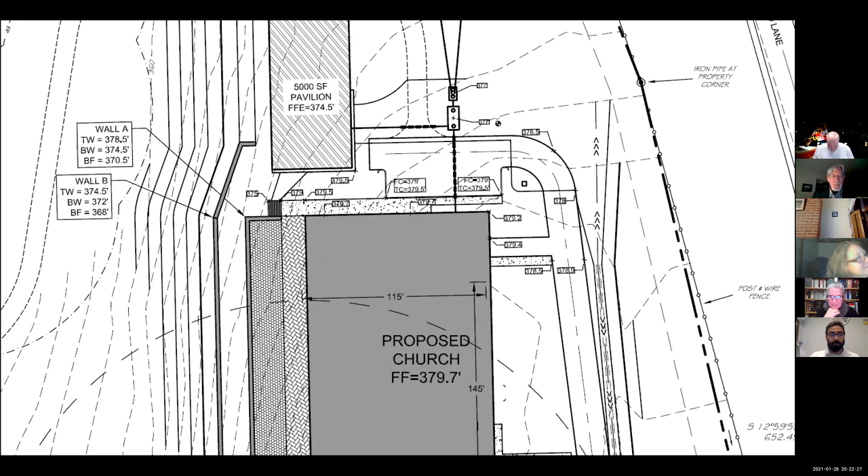That's right. But you mentioned something, maybe you misspoke, about a structure or a space where the congregation might be able to do their own equipment repairs. Oh, so if you go to the bottom right-hand corner of the phase 2 site plan on the site plan portion of our drawings, we show a small 900 plus or minus square foot maintenance garage.

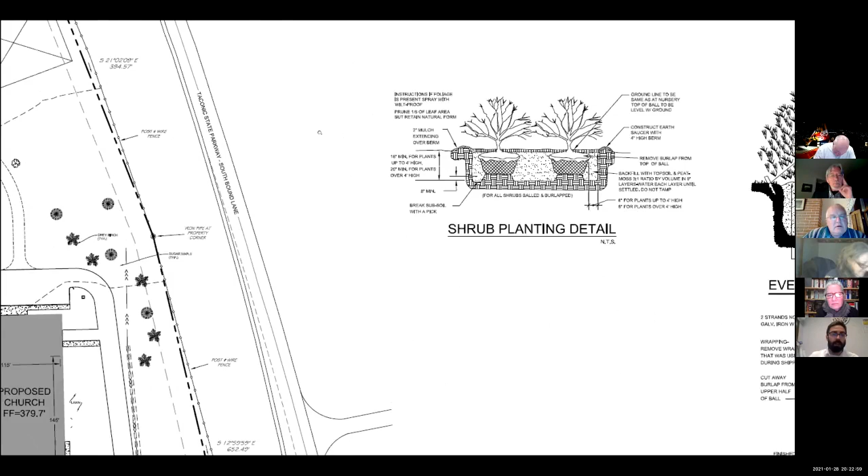The intent of that was more for equipment storage, but the applicants also were thinking about having congregation members bring some more community church services and organization, just to be able to help some of the older members out without having to send them to an auto body shop or something, but primarily on-site equipment storage for mowers and all of that. All right, so we may want to explore that more as we move forward on this. All right, were there any other?

Go ahead, Stacey. Yeah, there's specific parking lot requirements. So you might want to look at those, the type of curbing, the type of landscaping that has to be within the parking lot. There's all kind of specific regulations for that. So you might want to look at that before you actually design the parking lot totally. Okay. Right now we're actually incorporating some of our stormwater aspects into that island. We have a sand filter in that main median to kind of catch sheet flow coming from the building.

And if you've ever been to Adams down in Wappingers, they have a nice bioretention rain garden type thing in the middle of their parking lot that's collecting a lot of their parking lot stuff. But I know this lot is like almost solid rock, so you have to work with that too. But some rain gardens inside your little landscaped areas in your parking lot might be nice little additions, to not give it so much of a feeling of a lot of blacktop, but also break it up a little bit and really get some green space in there. Get some serenity to it.

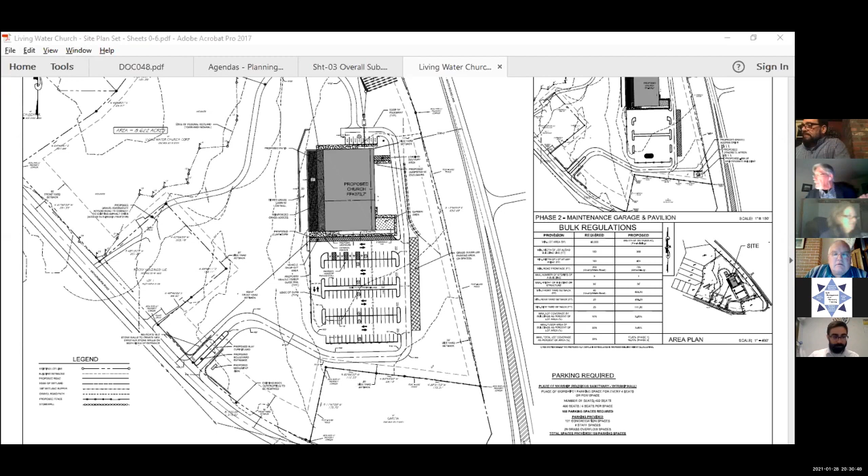Our next item on the agenda is H.G. Page Lumber. This is an amended site plan and special use permit.

This is a proposed amended site plan located on Route 55 at 360-364 Manchester Road, containing 2.79 acres in the Manchester Gateway Hamlet. And as with the previous application, because it's in an MGH zoning district, they require a special use permit because of proposed outdoor storage of landscaping materials.

So to position this, it is located in the area that used to have warehouses in between the Page Home Center and the corner where the light exits Old Manchester Road. Applicant's H.G. Page, and the engineering group is LRC Group, and I believe Kelly Leibold is representing them.

Are you here? Yes, Mr. Chairman, thank you. Okay, Kelly, thank you. Do you want to share your screen? Oh, yes, sure. It says host disabled participant screen. Okay, hold on. Sure. I'm giving it to you. There you go. You should have it now. All right. Okay.

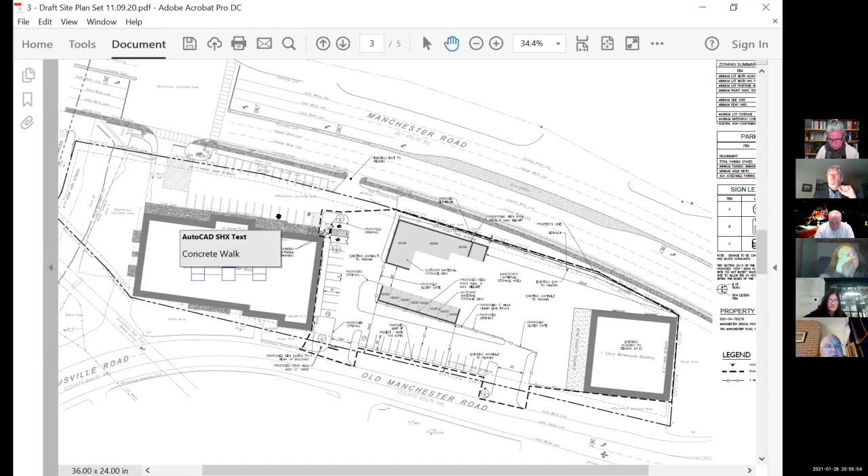And then check out the parking, because I think the reason why they're over there is there's planters in front of the building. Right here, yeah. And there's steps in front of the building. The only place that there's a nice gradual grade is along that wall, along that walk there. Yeah, I saw that Ken Casamento from LRC had created that little ramp area, and that's why I think they were placed there. Well, that's where they exist now. See the one in the front? That's where it is now because that's the most gradual grade to get up to the sidewalk there to get into the store.

Because the side over here next to your number 12, those are stairs. You have to go upstairs if you're using them down here in this corner where the building entrance is, that's where you go and buy the building materials. Yes. Down there by number 12. That's like 5 or 6 steps. Okay. Here you're saying, yeah, this is a big, steep site. Yes, correct. Thank you for that comment.

I was going to ask that too, where it says proposed new entry to rear of building. Are you keeping those steps or getting rid of them? They're staying. I don't know why that is there, but those steps are staying. Okay, is that going to be a ramp? I think what it is, there's a sidewalk here, which is a new entrance. These parking spaces here don't exist now. This is where everyone goes flying through at night to cut through. So what we're doing is creating these parking spaces, and then this sidewalk is being added. So I believe that's why that says proposed new entrance here to the sidewalk, and then you can get back into the front of the building. Okay, or is that going to be a ramp up to where that stairs is, you think?

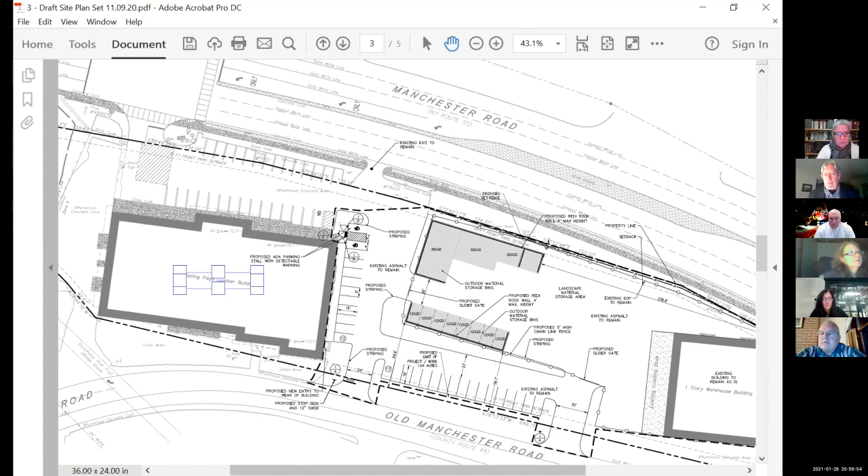Yeah, we want to see what you've come up with, because some of the stuff that we've asked you to do is to check into these things and give us some ideas, like the type of fencing, where the fencing is, the landscaping, that kind of stuff. So when we see that, we can get a better idea if it's more of what we have envisioned for the site. Okay, very well.

Mr. Chairman? Go right ahead. I just want to ask Kelly a question. Kelly, when you do make the resubmission, you can submit it to me digitally. Can you also supply 3 hard copies? Because now we have a board member who prefers paper maps rather than digital maps. Very well. We will do that. I appreciate it. Thank you so much. You're welcome. Thanks, Eileen.

Eileen, are you sure we don't need more paper copies than that? I thought we need 4. No, 3 is fine. Just for the resubmission. Once we do a referral and that's accepted, then Kelly will supply me with more. Most agencies now are doing it digitally, right, Jennifer? Yeah. New York State DOT, for example, takes it digitally now as well. And county planning.

But we need DPW, which is ours, Department of Public Works. We need zoning and one for our file. So that's three. It's too soon to ask for those yet, because once the amended site plan is reviewed by Greg and there are more changes to be made, I don't want to send it to county planning and get it booted back. No, I'm talking Department of Public Works, our internal. That includes Wanda. So it'd be Wanda, then Ken, and the file. Ken's already made a determination on this. Yeah, but as building and zoning, they review it also.

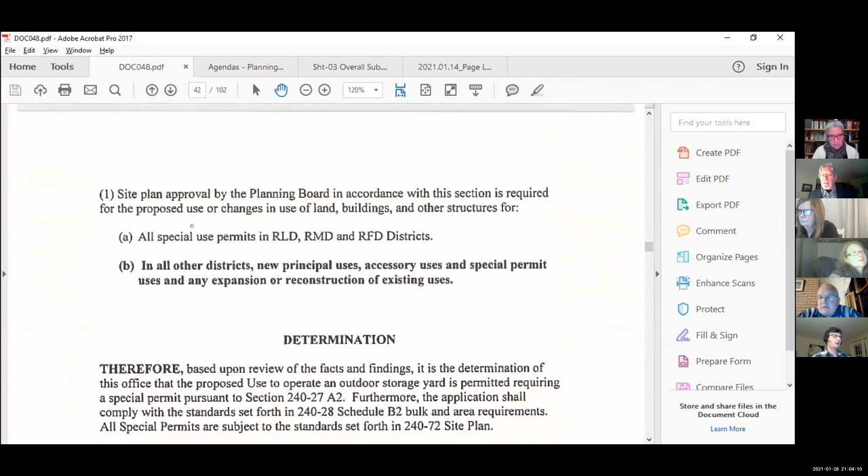So let's see, we do have a determination from zoning, and that's why it's to us now. I just wanted to point out to the planning board that there was an extensive amount of material provided with this, and that was in our packet that was sent out as document 048 PDF, and it's between pages 42 and 64 if you need to reference it. So is the applicant here to discuss this with us? I'm here, but I think Steve Weigel with my contractor is going to be discussing the actual details.

Yes, good evening. Hello there, Mr. Chairman. I'm Steve Weigel with Plug PV. Okay, how are you? Very good. How are you? Good.

So would you take us through what you're proposing? Absolutely. So this is a residential application, and essentially we're proposing an 11.52 kilowatt ground-mounted solar array comprised of 36 solar modules located in the backyard of the residence, roughly 275 feet from the forward property line, 145 feet from the rear property line, and centered in that backyard, 60 feet from the eastern property line and 60 feet from the western property line. The array is a single array designed to produce about 11,600 kilowatt hours for this residence specifically. There will not be any sharing or remote net metering of any of that power. That's designed to offset the consumption of this homeowner.

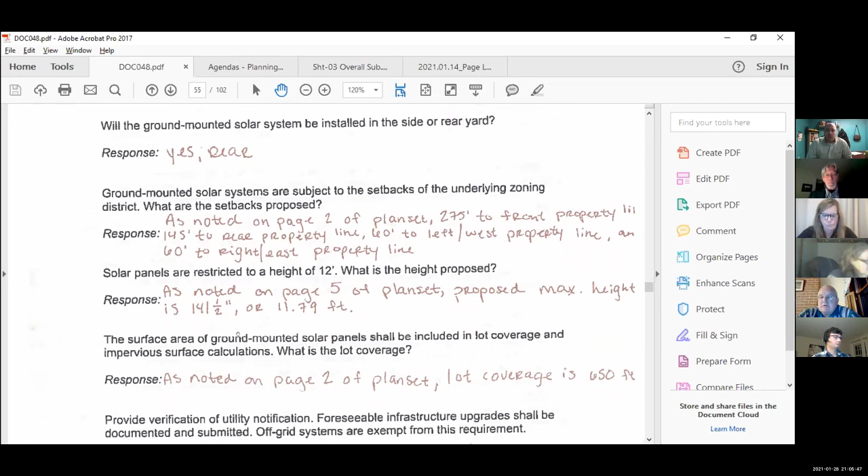It is a ground-mounted array engineered, designed, and manufactured by Solar Foundations, headquartered here in New York, up in the Clifton Park area. And the application will go into the ground through the use of single flight helical piles, 6 of them. The overall array won't take up more than 650 square feet of space, which is essentially about a 33-foot 4-inch width by about a 15-foot leading edge to rear edge. The panels will sit at roughly a leading edge height of 28 inches and a rear height of about 141 inches.

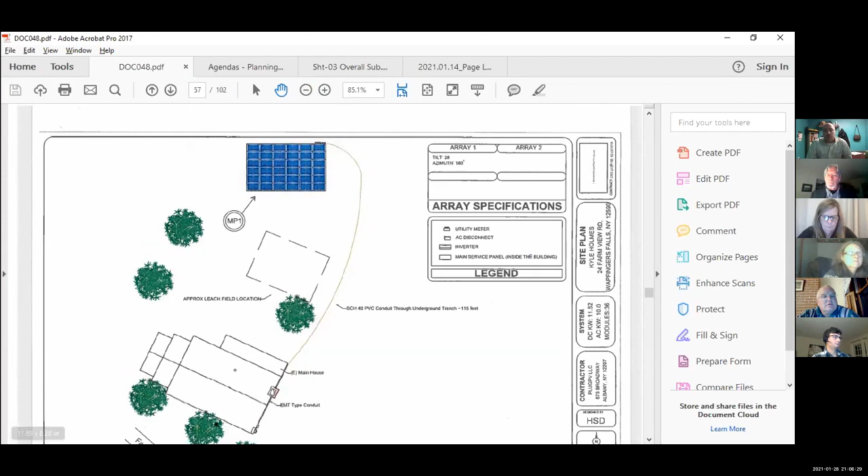We will be trenching from that array to the residence, and we will be interconnecting with the customer's existing electrical utility service right there in the vicinity of their existing utility meter and main service panel. With that, I think really we're here tonight just to hear what questions the board might have and see if we can get some answers for you.

All right, well, typically for ground-mounted solar arrays, the planning board usually does a site visit because one of our primary concerns is the visual aspect of this and the impact to any neighbors or surrounding properties. So that's something that we'll certainly want to do. We'd like to come out there and see the area where this will be placed. If you could at least mark or stake that, we'll try to set a date and time tonight, and then we'll try to come out there and see that together.

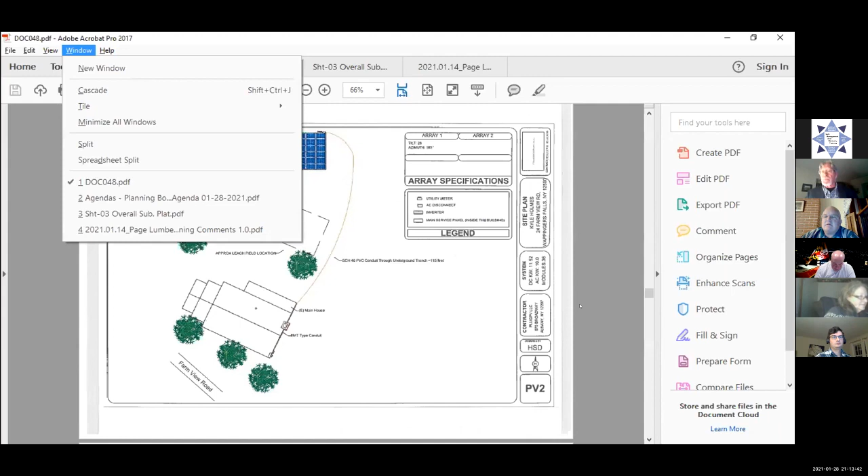All right, so we have a pretty good number of folks. If each of you would send an email to me with your availability for that Saturday, say something like 10 o'clock in the morning, would that be all right? Yep, 10 sounds good to me. That's fine. All right. I just want those folks that can or cannot to confirm their availability, and that's what we'll shoot for. All right. Sounds great.

All right. We should set a public hearing for the next meeting. What is the date on that? 2/25/21. All right, so we'll set a public hearing on that. I'll need a motion to set the public hearing for February 25th. So moved. That's Mark. Mary seconds. All in favor? Aye. Okay.

Approved. And then we'll also need an escrow payment on this one. This is a relatively small one. We would need an escrow of $250. Anything that's not used as part of our review will be returned to you. Could I have a motion for a $250 escrow? So moved, Dennis. And second, Stacy. All in favor? Aye. Anyone opposed?

All right, so we will definitely see you at our next meeting, which is the 25th at 7 p.m. And we will be out there on the 6th for a site visit at 10 a.m. Sounds good. And contact the planning office for the packet on how to advertise for the public hearing.

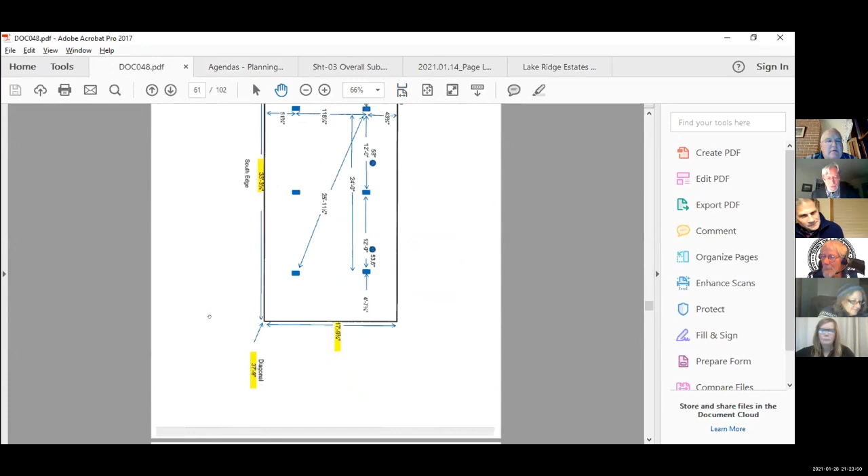Discussing water, sewer, stormwater infrastructure, and also private road details. We also need meetings with the highway superintendent and DOT. And she had a couple of other comments about the wastewater treatment plant. Right. So we have a number of people who are on the board now who have not heard the project. If you could give us a recap of the project and then get us from where we were to where we are now. Sure. The property was formally approved as a 24-lot single-family residential subdivision with a road system. This development, it's over 10 years we've been working on this now.

It was in front of the planning board previously in conjunction with a rezoning request to have it rezoned to the Alternative Senior Citizens Housing Development District. The planning board performed the environmental review and it issued a negative declaration. We were then sent to the town board and the rezone request was granted. So now we are back in front of the planning board to continue and hopefully complete our site plan review.

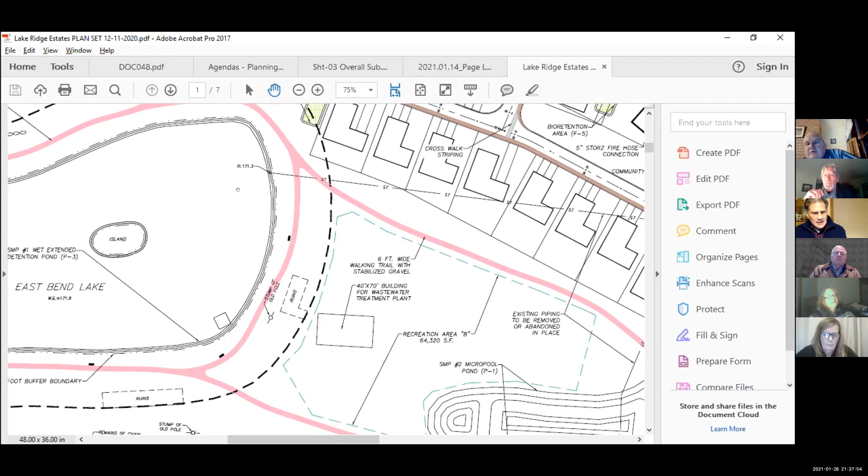And anything else, Stacy? You might want to just talk about some of what you're going to be doing to East Bend Lake. Okay, so it gets the passive recreation, but you're going to be cleaning it up and changing some stuff.

Yep. Well, one of the things that we actually found out as we got involved with this project was that East Bend Lake was considered to be a dam. Basically in the area where you see the little inscription, actually the other way, Jennifer, where you see ruins there, that area was, I guess, a fill section back when the lake was constructed, I think back in the 50s. And the depth of the water behind that fill, I think, was around 10 feet, which I think is right about at the threshold that would classify it as a dam.

I don't know whether it's still that deep. It doesn't really look like a dam because the slope from the water's edge is relatively gradual out towards McGee. So it's very gradual. We've been in contact with the DEC. One of the first things they asked us to do was to get up there and clear any large trees off of that area, just to provide some protection if there was going to be a storm. And God knows we've had some of those windstorms lately that would take down a big tree and uproot it and possibly compromise the bank.

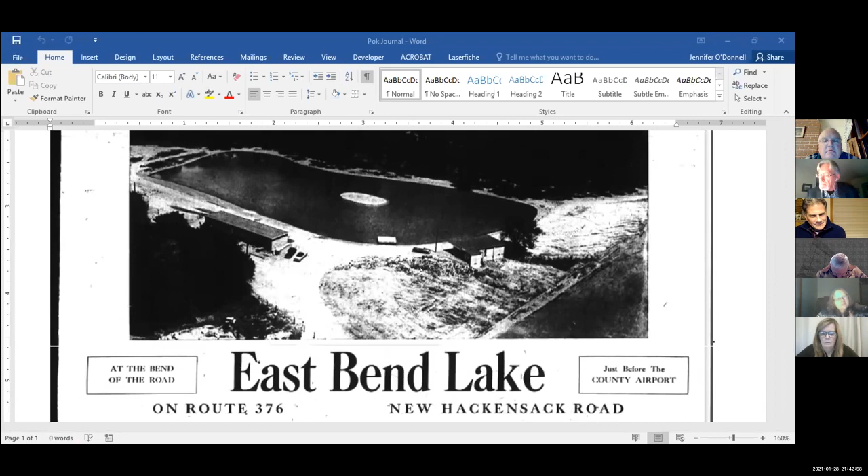And then Mark went through and made sure it had all this fire protection stuff. So that was a big part of it. The houses are all going to be sprinklered. We had several meetings with the fire department, all of them very positive. We started talking about dry sprinkler systems, and I think it turned out very well. They're going to be wet sprinkler systems. Everything's coming together.

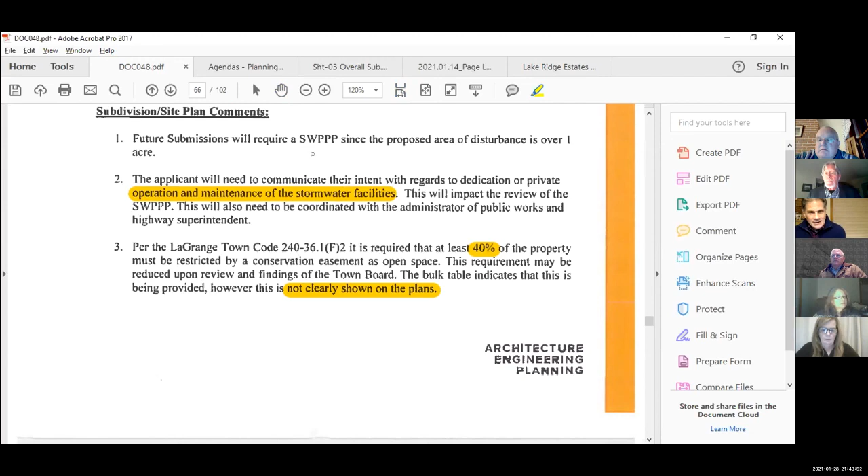Oh, did you want to mention too, at the clubhouse, you're having the different, I can't think of what it is, like an emergency thing for the residents? Well, that's an important thing, Stacy. I'm glad you brought that up. The genesis of this project was for the concept of aging in place.

Several of the people involved with this project actually had personal experiences with aging parents, and there gets to be the point where, in order for people to stay at home, they need some assistance. Sometimes family can provide that. Sometimes it's with hired aides. Sometimes it's with both. And there's certainly a variety. Sometimes it's an hour a day. Sometimes it's 12 hours a day. Sometimes it's 24 hours a day. And as you can imagine, the more those needs increase for a person, the more expensive it gets.

So the concept was trying to develop a situation where perhaps we could use the economy of scale of having folks with those needs in one central area, and for the folks that might need maybe a visiting nurse once or twice a day, if there's several of those in the area, they can make the trip and go from house to house to house, rather than having to hire somebody for 8 hours or hire somebody to be there 24 hours a day. They can be people that come in and check in.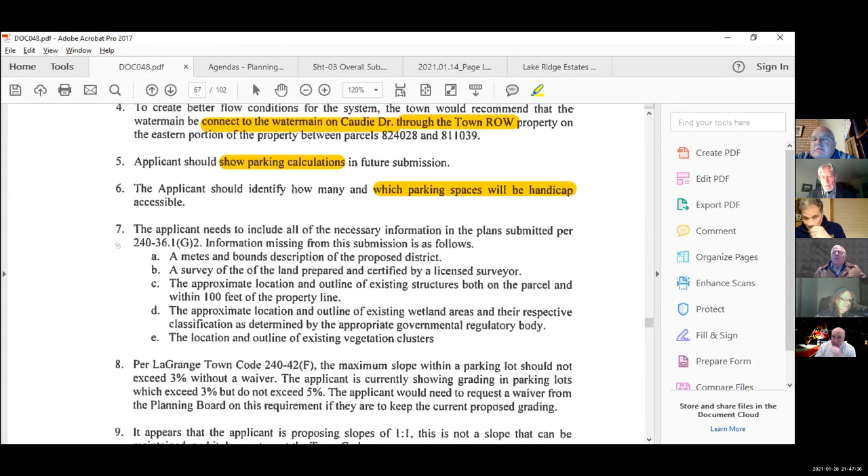Okay. Larry? I did want to ask Greg if I could call on you. Is there anything that the planning board needs to be aware of or that we should discuss tonight on this before we move on? I think as Larry had mentioned, a lot of this stuff is just process. Those things will need to be obtained. The one concern I had was the one-to-one slopes between some of the houses. There were some very steep slopes, and whether or not that could be accomplished with the retaining wall combination, and I kind of also thought that might be something that the planning board may want to weigh in on.

And then the other thing was I know that there was the 40% open space requirement, and it's just a matter of it being delineated so that it's clear where that open space is located. Yeah, I'm comfortable with the 40% open space because we beat that to death with the town board before we even came to the planning board with the environmental review. So we'll get that delineated. I think I actually have an open space plan that will include that. Okay. I couldn't imagine that hadn't been discussed at one point. Yeah, that was actually one of the requirements of the rezone too. So right. We'll make sure that gets demonstrated.

The one-to-one slope, Greg, we can certainly look at retaining walls. I've always been one who would much rather do a reinforced slope rather than a retaining wall, just because they just seem safer to me, rather than falling over the wall. Yeah, we can always look at those.

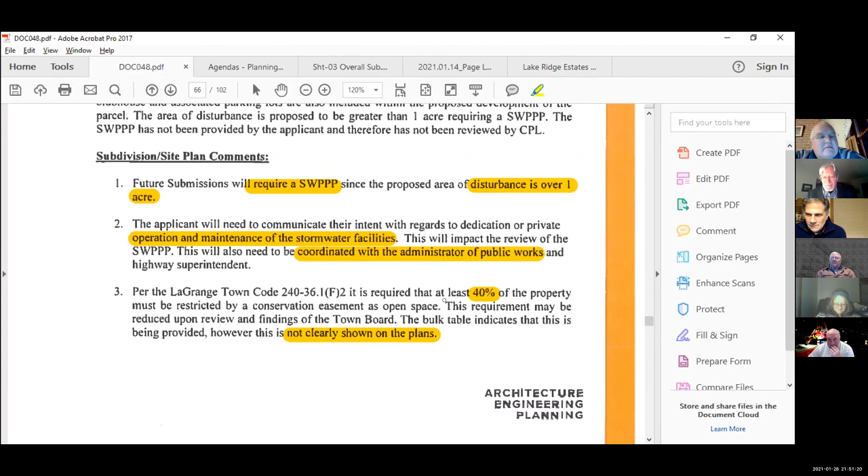I don't know if you want to discuss it tonight, Mr. Chairman, but I do have a concern, Larry, about the secondary entrance, as well as a couple of other concerns. Should we discuss that tonight or not? Sure. Go right ahead. Due to the density of the project, it's tight in there. I think there should be a secondary entrance available to the various agencies.

Okay, so we did provide, I don't know if you remember, a secondary entrance to the parking area down in front by McGee. Correct. Is that still there? That's definitely still there, right at the end of that cul-de-sac. Okay, good. I wanted to make sure that you weren't talking about replacing that one with the other one in the back. No, that's it right there. Okay, as long as there's two, I'm happy with that.

My other question is, will the management company be responsible for posting oxygen located in the development or in each specific home, or will the homeowner be responsible for posting if they're on oxygen and have oxygen tanks? How are you going to manage that? You know what, I'll have to ask that question, Mark. I'm actually not sure. I would think the management company would certainly be willing to do that if they have the legal right to do it. Well, it has to be. By law, it should be posted if and when there's a resident on oxygen, in a front window or by a front door.

But we won't know if an emergency happens going in. So I want to know if that's a rule you'll set up for your homeowners, or if the management company is going to do it, because it has to be identified. I'll get that answer. It's a community that's aging, I think that's an important factor. I'll get that answer for you, Mark. Greg, do you agree with that?

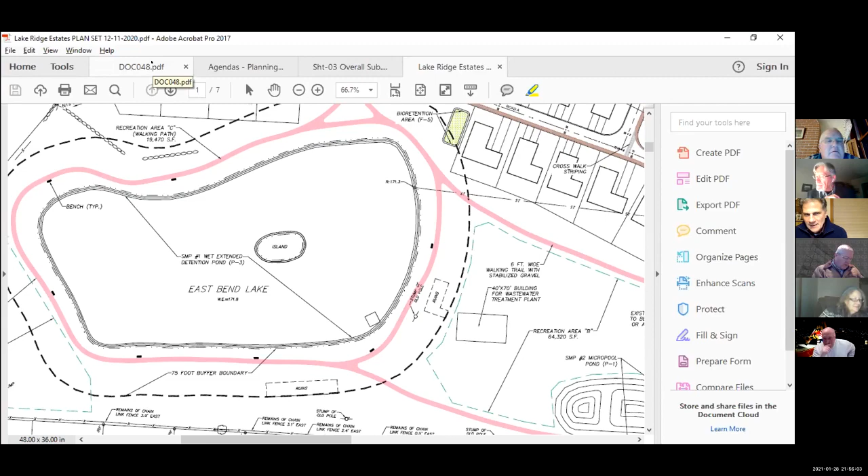Thank you. So Greg, you had mentioned that the board has to also talk about parking lot slope, 3% as opposed to 5%. Yeah, let Greg and I talk about that a little bit before we discuss. Okay, yeah, because I'm not sure. You might work that out. We're making it 3, I just want to look at it a little bit closer. Yep. If Greg and I agree that it makes more sense to keep it 5, then we'll come back. Yeah. And the code allows up to 5 with, I can't remember exactly the way it's read, but with acknowledgement approval of the planning board. Okay. Greater than 5. Whatever you guys decide, just let us know what we have to do. Right. Okay. No, that sounds good.

Larry, one other question I have for you. The gate going inside, you're definitely going to make it a siren gate for us, correct? Yes. You'll have to give me the particulars for that when we get that far. Okay, Mark. Either I'll give it to you or the chief can give it to you anytime you want. Okay. Thank you.

Hey, Larry, the lake, was that going to be fenced in? So there's no ice skating, no ice hockey, no swimming? I don't think the idea was to actually put like a chain link around anywhere. I think there was post and rail that was going to be put up and around. Right. It'll be posted. Right. I'm sure it'll be posted, but I hope that doesn't become an issue. Yeah, the only thing I'm thinking about is right now, pretty much only us know it's up in there. But once you develop it, a lot of people are going to know it's up in there. And the management company will have liability for it, so they're going to be the ones that have to enforce that.

Yeah. Well, you put 120 families in there, and the Revlon effect's going to kick in, and they're going to tell 2 people, and they're going to tell 2 people. And I can picture it already. I would be one of the ones trying to sneak in there and go ice skating. Yeah, then Mark will have to come rescue with his boat.

So, Dennis, Mary, Paul, Al, any other questions or comments that you want to bring up now? No, I think I'm good. I'm good, guys. Okay, super. I'm good for now. All right, so we'll see you in a couple of months, I guess.

Yeah. Chris, did you want to discuss the escrow? I think we have escrow, don't we? Yeah, I thought we do. Yeah, we do, but we just want to make sure that you know that it needs to be replenished. Yeah. I'll send you an email. Yeah, make sure that all comes through us, and we'll keep pushing for that. Okay. Thank you. And contact Wanda at Public Works, and then she'll arrange everything that has to be done between you and Greg. Will do. So just contact her office. That sounds good.

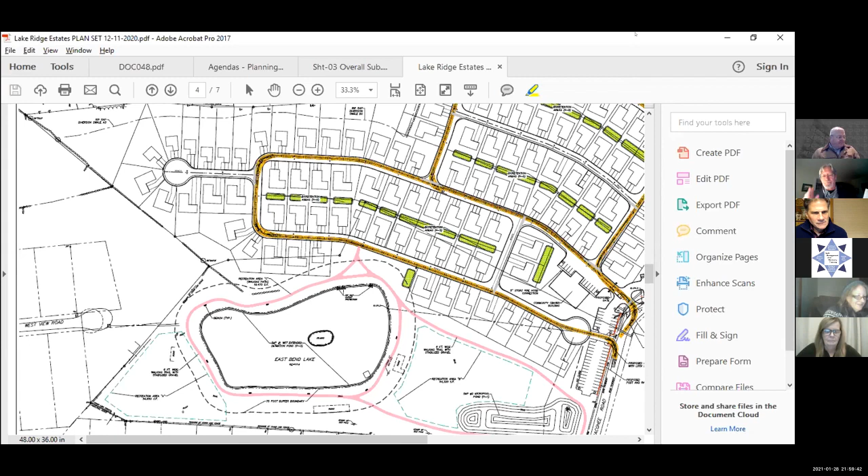Good night. All right, so next up is Daley Farm.

And this is a subdivision and site plan. Proposed subdivision and site plan located at Noxon Road, Titusville Road, containing 233.36 acres in the Daley Farm Planned Development District, PDD. Excuse me. The applicant is seeking final approval for a subdivision containing 51 single-family lots, 76 townhouse lots, 9 estate lots, and

a farm site. It will also include a connection to the William R. Steinhaus Dutchess Rail Trail. By the way, it was listed on your paperwork as the Hudson Valley Rail Trail. So it is the Dutchess Rail Trail. And I believe the engineer representing this application is Peter Setaro.

Yes, sir. CPL. Can you hear me? Yes, we can. Okay, very good. Before you get started, Peter, I just wanted to also check. Our conflict engineer is Rennia Engineering representing the town, and I wondered if they have a representative on the call tonight. Hi guys, Peter Sander again from Rennia Engineering. Just here in case you guys have any questions.

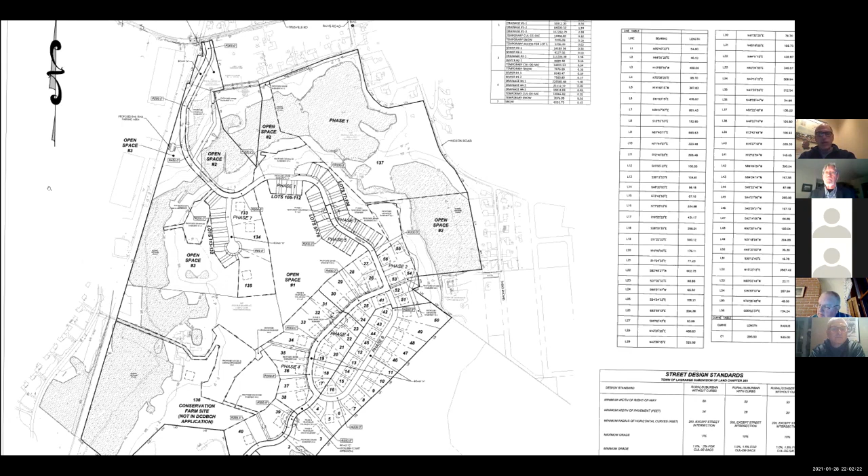Sure. Thank you, Pete. So we've been working on this Daley project for a long time now, more than 10 years. We started with the planning board and the town board. We needed to get a PDD designation, Planned Development District designation, which we received a number of years ago. And we did an environmental impact statement and received a negative declaration, or actually, that's not correct. Our DEIS was accepted, and we proceeded to do an FEIS, and that's been completed as well.

And so we've been working with the various agencies. We needed to get approval from the county DPW, from the DEC, and from the town and the county health department. And Pete and his firm have been working hard on that. We're bringing it down through the home stretch now. So, Pete, please take it away.

Okay, thank you. I think the last time we appeared before the board was before we filed for final approval, which was probably a few years ago, and I don't remember how many of the current board members were there at that time. So, given the hour, I'll give a brief overview. I'll orient you to the project based on the map, give a brief history, which Steve has basically done, and then where we are as far as the approvals. I like to use the analogy of a baseball field. For this project, we're on third base heading for home.

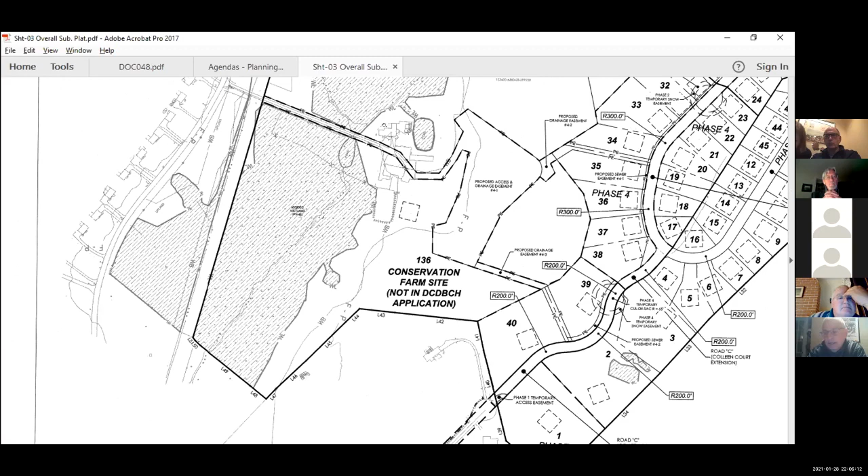So right there. At the other end of the project, we're tying into Colleen Court, which is part of the Bray Farms subdivision. And off to the left of that is the farm lot, which is approximately 50 acres. That's the former Petrovitz farm. That farm will be retained, and it'll be part of our conservation area. So if we could go back and zoom out to see the overall plan a little bit. Thank you for that.

As the chairman said, the project consists of 51 single-family lots and 76 townhome lots, which you can see, the townhome lots as you start to come in from Titusville Road, right in that area. Then there's also some townhouse lots right there off of the cul-de-sac road. And then smaller lots as you come up on the top of the hill, smaller single-family lots all up around the loop there.

And then we have a bunch of larger lots. Some are off of the small cul-de-sac road across from the townhomes. And then what we did going towards the Bray Farm subdivision, we actually made a change to our original plan after working with many of the Bray Farm property owners. We wanted to make a transition from the smaller lots. As you can see, the smaller lots are like 5, 6, 7, 8, 37, and 38. But as you get towards, if we could scroll just down a little bit, great, thank you.

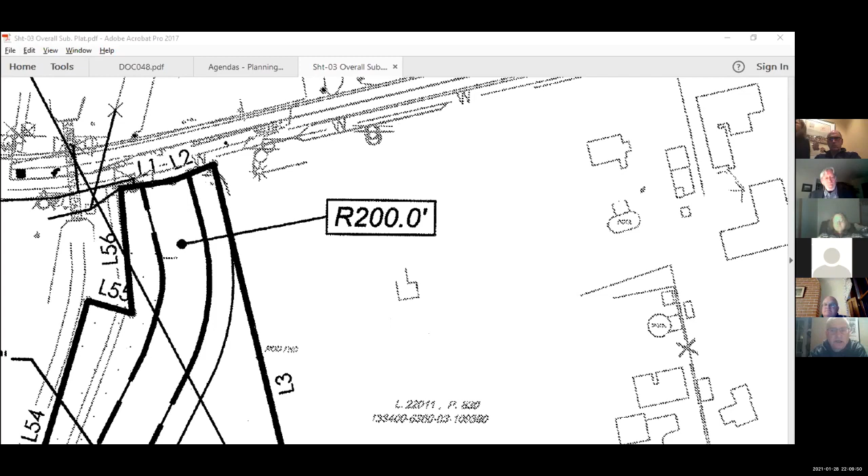As far as water and sewer, we're going to be tying into the town water and sewer facilities. There's no issues as far as capacity in the sewer plant. There are some improvements that the town is undertaking to one of their water facilities, basically to provide more storage capacity for the project. So the town is working on that separately with the health department and the Department of Environmental Conservation. Glancing down here at my notes.

I guess I'll get into where we are as far as approvals. For about the past year and a half, we've been working with both the county health department and Rennie Engineering's office on many of the technical details of the project. The layout has not changed in many years. So we're down to working out the technical details of the water, the sewer, and the drainage with the health department and with Rennie's office.

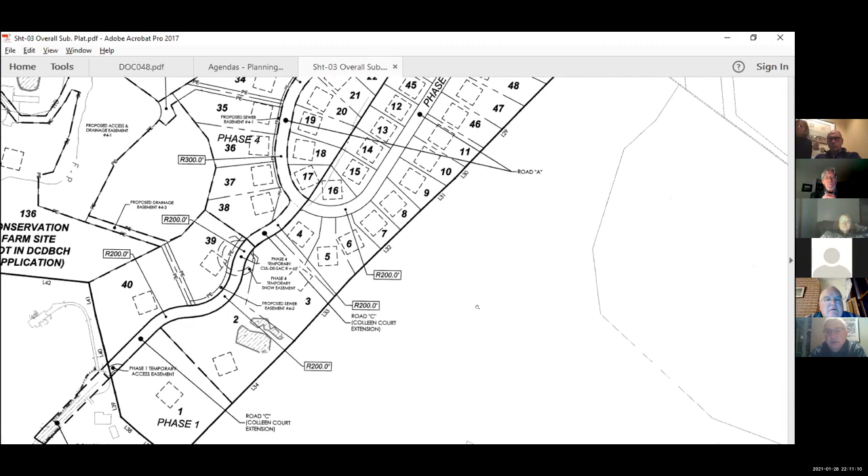We've got a recent round of comments. We hope to make one final submission and then really whittle down to a limited amount of comments with both the health department and Rennie's office, to the point where perhaps the town would feel comfortable granting conditional final approval.

As part of the other agency approvals, the county public works department has informally approved the widening plans. There's one small change I need to make on the lane widths, and then we will resubmit to them. We're also refining our design of the entry road coming off of Titusville as you get to the bridge crossing the stream.

It's very flat for about the first 1,500 feet from Titusville Road back into the site. So we've had to play around with the profile and some of the grading to make the drainage work in that area. That also has a little bit of an impact on the slope adjacent to the emergency access road to the rail trail. So we're going to be working with the county to finalize that. I would anticipate that we should have the county approval shortly.

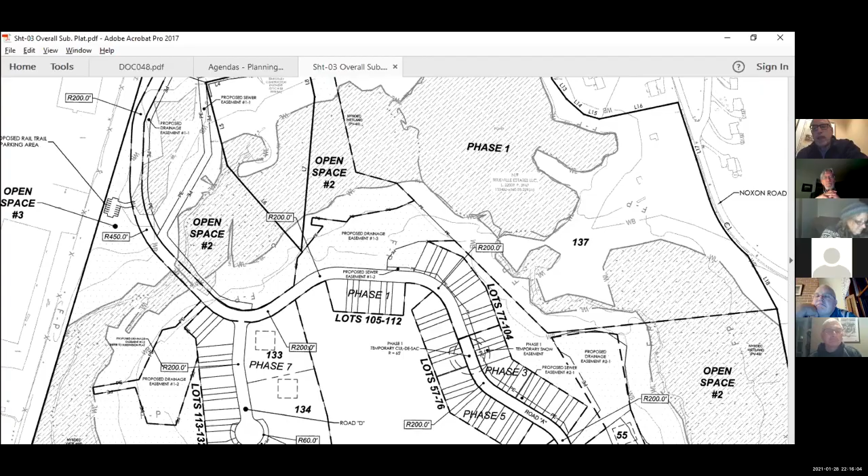lovely pond, which a lot of the townhomes are going to be looking down at. And then we're preserving the farm, which is going to be a separate parcel. And we're hoping to sell it to somebody who's going to continue to farm it.

I just have a question. We had discussed the light at the entrance, and that you were going to have a light there that was timed with that Gold's Gym light. That's still in play? No, the county has indicated, and I think there's a letter, Stacy, floating around somewhere, which I can find, but when we came back, I want to say about 2 years ago, before we started the final approval process, the traffic engineer had updated the original traffic report, because it was many years old, with some updated traffic counts and numbers.

So as part of that, when the county reviewed it, they said that it didn't appear to meet a warrant for a traffic light, but that they would monitor the situation, and if a light was warranted, then they would require the developer to install it and have it coordinated with the Gold's light. So at this point, with the length of the turn lanes and things like that, the county believes that this intersection will work well without the light, that there'll be spacing created by the light at Gold's and the light at the Noxon on Titus.

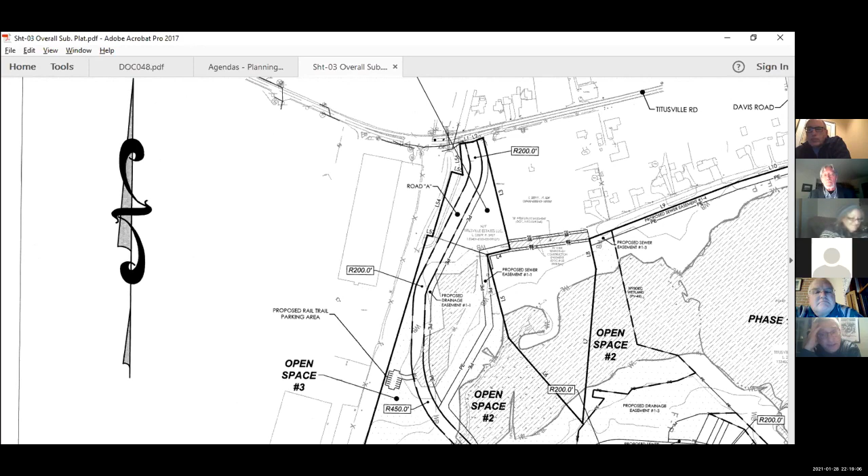when we get there. And my next question is, the lot that I think is a commercial lot down there by the plaza. Is that going to be a subdivided out lot? You know, Stacy, you would think after all these years, I would have known this already, but I was looking at this plan on my desk, and I kind of think that does have to be a separate lot.

It's going to have to have. Pete, I was under the impression, and this is what our plan was, that we're creating a separate lot, but the lot is not part of this application. That's correct. Right. But it would have to be, yeah, sort of part of this application, because you've got to get it out of there. Well, right now it's in your land. Right. So we have to assign it a number. So, parcel number. Yeah. Right.

And so at one time, Pete had done a little feasibility to show what could be done. I mean, we have no user for it. We haven't designed anything for it. But in my mind's eye, it would be maybe a small professional building, something like that, for a vet or a dentist or somebody like that. And that was part of our PDD approval, I believe, too, Steve, right? That we had to create a small commercial component.

Right. We'll come in for site plan when we have a use for that. Right. And we would discuss, because there were things that we wanted, like possibly a cut through to the plaza and all that kind of stuff. But that would all be discussed when you came in for that particular parcel. But I think instead of just writing on there that it is a commercial parcel, it needs to be cut out as a lot for future use. No, you're 100% right. You're correct.

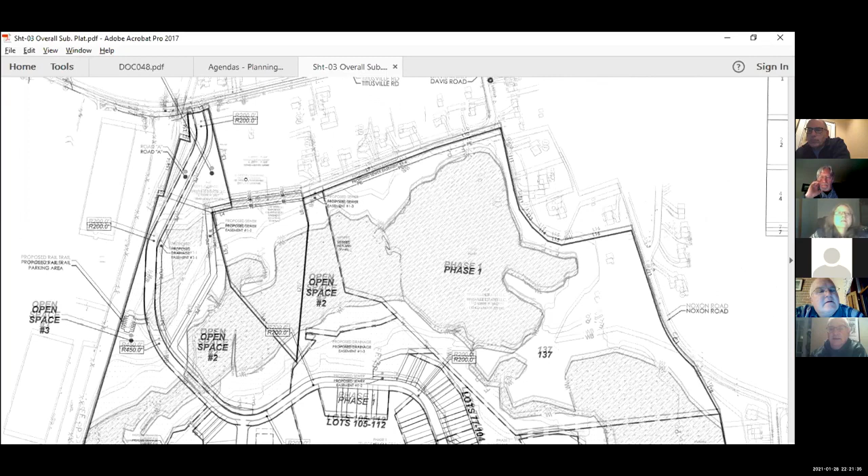Pete, I'm curious, the lane widening, how far would it go towards the Noxon and Titusville intersection? I was the foreman who installed the light for Gold's Gym and widened Titusville Road. Yeah, it's going to end, Randy, approximately at the furthest access point to the commercial plaza. Oh, okay. It's not going to go all that far. And it's actually going to take out the kink that's there now; if you drive the road, it's not a smooth curve.

Yeah, there is a lot of extra room there because years ago they had widened that when that plaza was put in. That's right. So it is wide enough. But they also knew this was going in because we've been trying to develop this site for the last 30 years. They do have enough room to reconfigure the road. That was actually one of the county's comments. I think they wanted to change the lane width from 12 feet to 11 feet, just to give us a little more room there.

Well, when they put the rail trail bridge in, you had already given all your numbers, and they were originally thinking about the light then, so they widened it knowing that you were coming. Yeah, in fact, they needed more room for the rail trail and the emergency access ramp, so we gave them an easement across our property. And now for Pete to make the entrance road work, we're going to have to work with them on that easement property. But fortunately, they're working with us. It's not going to be a problem. And the easement contains language about our ability to modify some of that area subject to their approval.